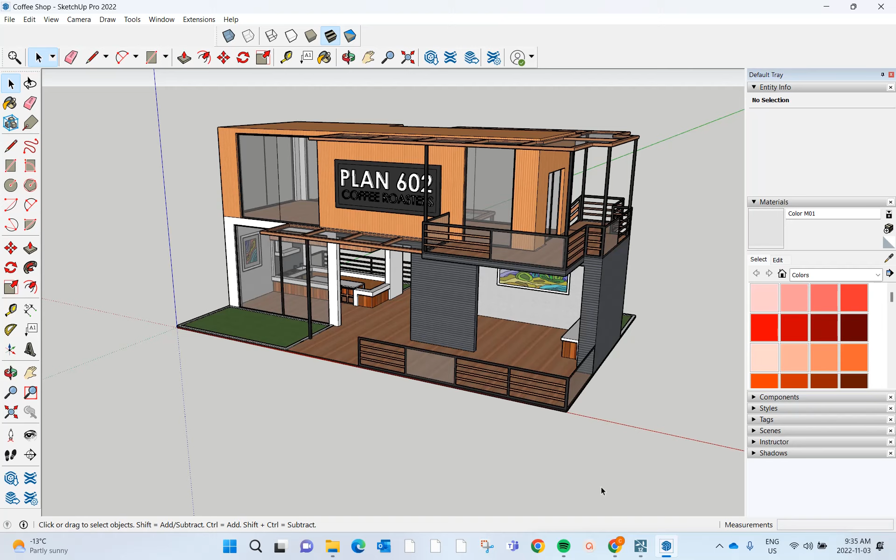Now, the other thing that's really great about Lumion is the fact that it works with different modeling software. I'll just pull up what I was working on here before. Don't worry, this is just a random model I had saved somewhere, so don't panic if you don't have this. The idea is, this is a SketchUp model, but Lumion has the power to import many different kinds of model types. You can work with SketchUp models, OBJ files, 3ds files, and many more. So it's very robust, it's compatible with a lot of modeling software, and all in all, it's just a really great tool for rendering your work in.

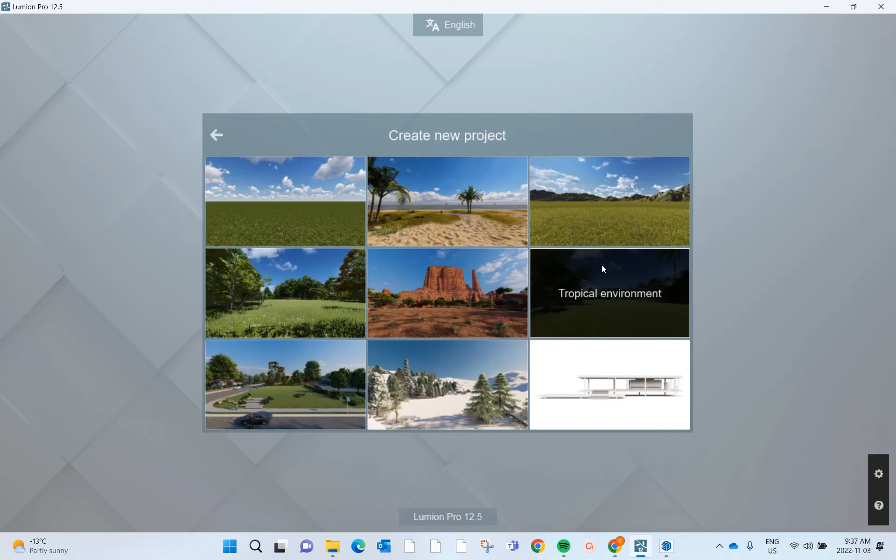Now, if you're faced with this interface here, you're going to have a bunch of options. You're going to have create new, which is really just going to let you go into a completely fresh template. If we click into here, let's have a look and see what we have. As you can see, you've got a bunch of just empty environmental templates that you will be able to import your work into. Now, what we're going to do, just for the sake of demonstration and getting our bearings, we're going to go back one.

Instead, what we're going to do is we're going to move our cursor over to examples. Now, check this out. Maybe it'll look a little bit different for you, but whatever you're currently running Lumion on, you should have something kind of like this, where it offers a bunch of different examples that you can just pop into to have a look around inside. So it doesn't really matter which one we pick. This can just be good exercise for getting your bearings, but let's go ahead and pick, yeah, this one looks good.

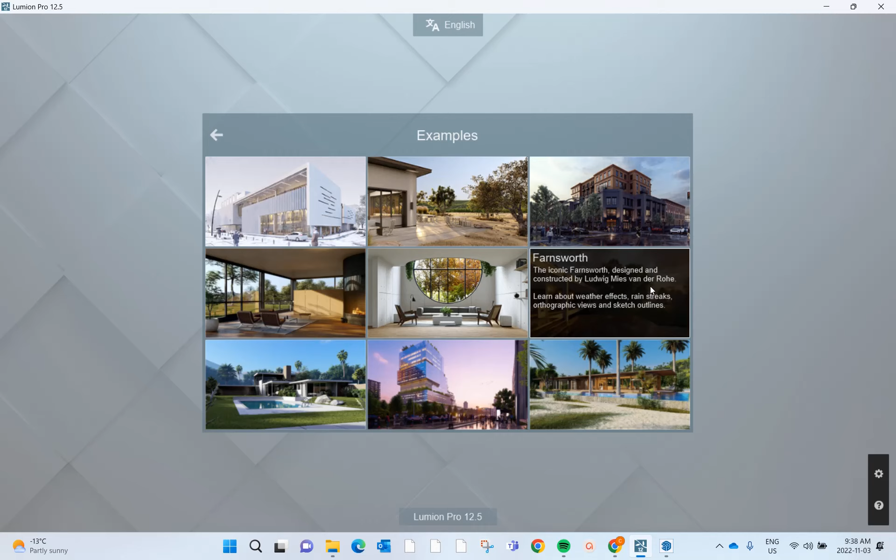Let's try Farnsworth, let's see what that's all about. This will be a good way for us to get used to navigating around without having to do a bunch of work of building a bunch of stuff first. So let's see what one of these examples has for us.

Awesome, so it might have taken a minute or two, but here we are. That's because it was loading tons and tons of polygons, and as you can see when you look around, there's a lot of different stuff being rendered.

So why don't we get a little bit of our bearings. As you can see in Lumion, you're going to have buildings, some movement in the trees, and people. All the built stuff we're working on in Lumion is available to be edited and changed. Currently we're in something called build mode.

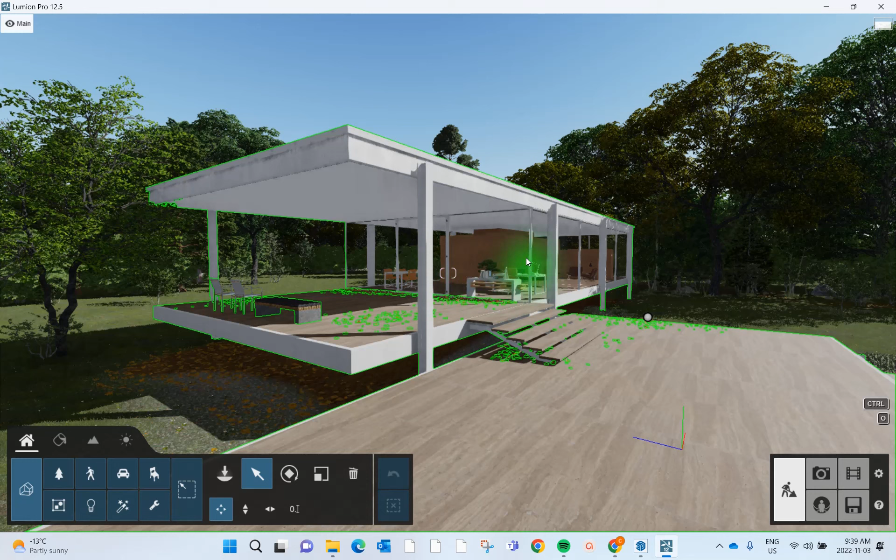Now let's take a little look around here. This is where your 3-button mouse is going to be really useful. If you hold your right click down and drag, you're going to be able to start looking around. I'm just holding right click and dragging, and I can pan just like that.

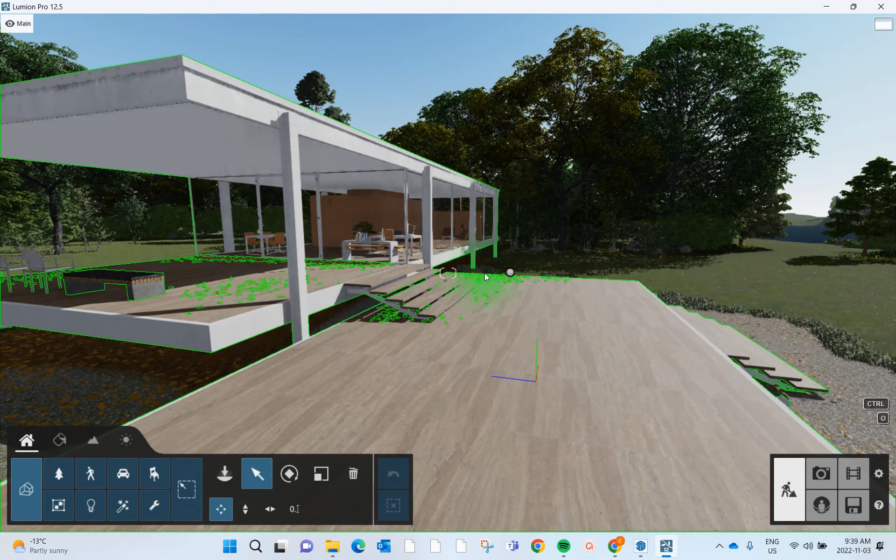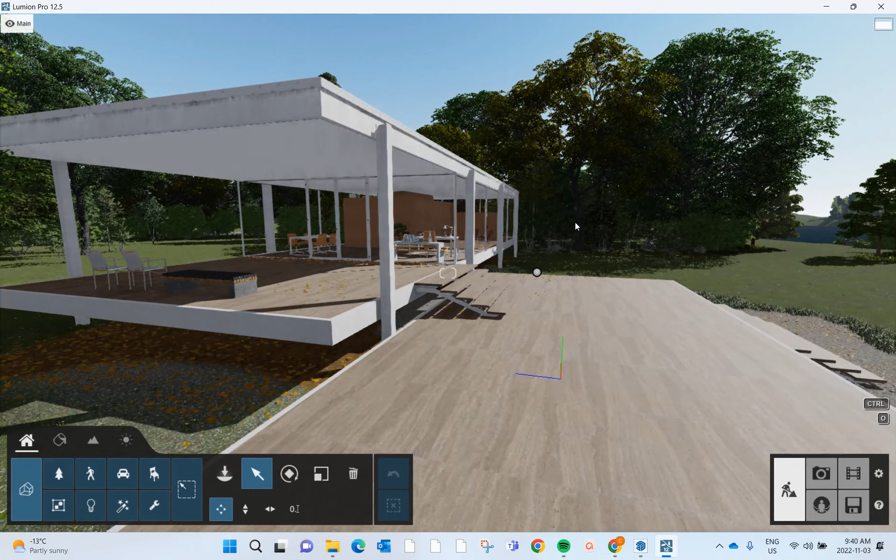If any of you play video games, you'll already be familiar with this. To move in Lumion, you use the letter arrow keys, W, A, S, and D. W is move forward, S is step backwards, D is step to the right, and A is left. You can pan your cursor, hold right click down, and using your arrows decide what direction you want to walk in while focusing your eye line on where you want to go.

But let's say we want to change our perspective a little bit, because getting a different view or a bird's eye view is going to be really valuable. You can tap E to shift downwards, almost like crouching, and Q to shift upwards. So essentially you can move along any axis you want in Lumion.

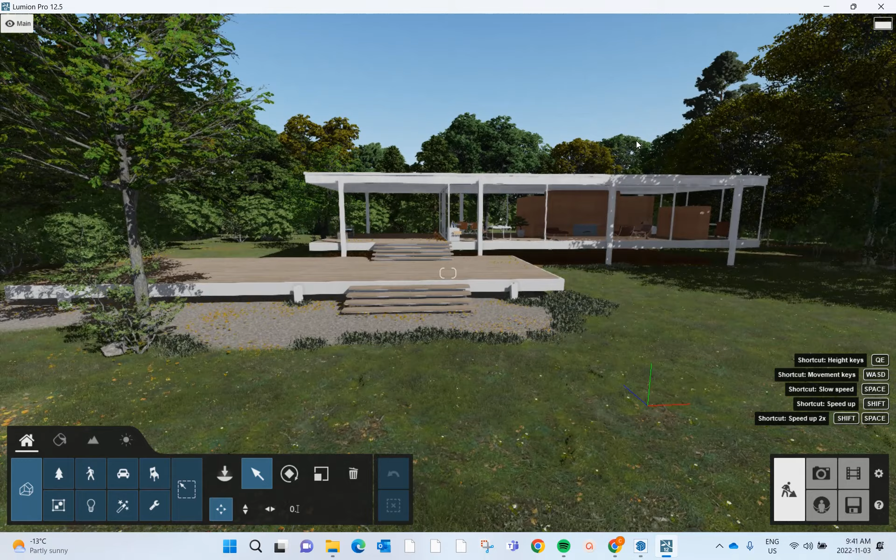So let's say we're ready to change perspective here for a second. We're going to go flying for a minute. Hold Q down, and you'll find your perspective is elevated.

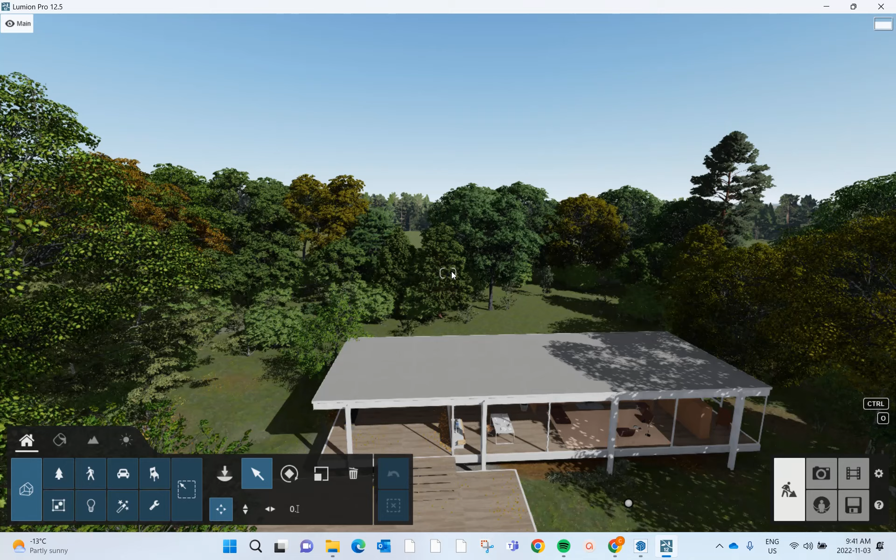Now let's say for a moment I want to see this tree over here, maybe see what kind I picked or what kind of leaves it has. When you're moving around your model, I recommend putting your cursor in the center of your screen, almost like down this little scope, then right clicking so that wherever your cursor is, you're automatically oriented with where you're looking. Then, with the right cursor held down, I can just tap W for forward to start moving towards it.

Now let's say your model is really big and I want to get there faster. So I'm holding W down, but also holding Shift down. That'll zoom me there a little bit faster.

Now, Lumion is really big and powerful and capable of doing tons of unique stuff. Just to give you a taste of what we can do now that we've had a grasp of moving around, let's talk a little bit about some of the essential functions of the interface. Let's get turned around and talk about our interface.

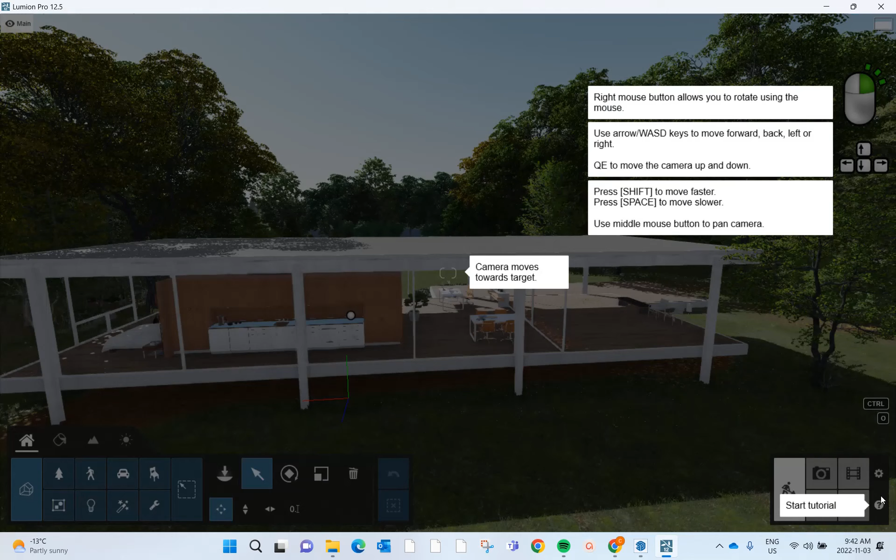Move over to the bottom right of your screen. Do you guys see this little question mark down here? That's a really handy tool if you ever get lost. If you move your cursor down to the question mark, it will give you a quick blip telling you what the different buttons do. So again, if you're ever lost, move your cursor down here and this will get you reoriented.

Now, everything you see in this corner, these four, photo, movie, save, and 360 panorama, all center around exporting. In this class, a big part of what we do is taking things out of the building and working, fine-tuning interface and getting it out of the box into presentation mode. The export section of your Lumion interface is your ticket to doing that.

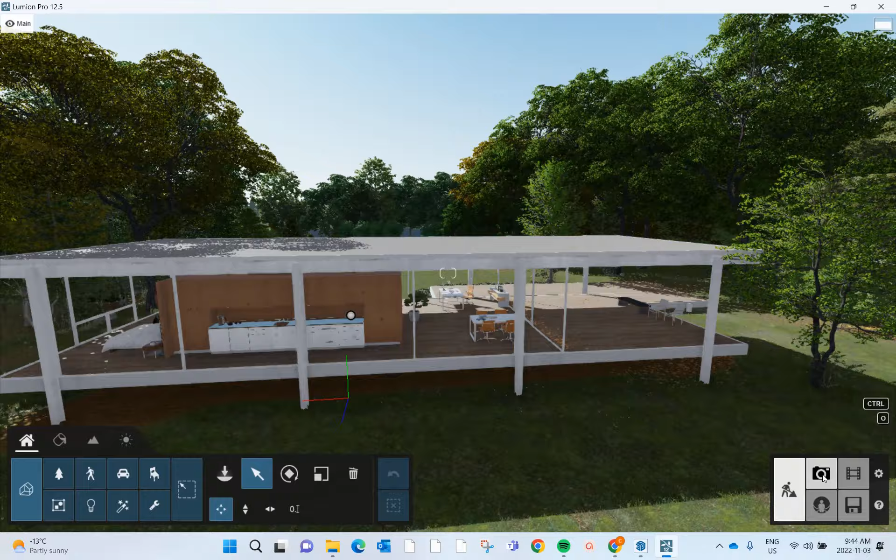Now check this out. Right now, see this guy digging right here? That indicates build mode, and it's highlighted because, like I said before, we currently are in build mode. But we want to see what Lumion can actually export. So we're going to move our cursor over, and instead of build mode, we're going to click on the photo button so we can see how to export a still image of what we're currently working on. Okay, awesome.

So now we're in the photo section of Lumion. Now you're going to notice something right away - obviously this is the direction I was looking in. But if I click into one of these, they're all pre-saved. Check this out, I'm able to look around and move exactly like I was able to in build space.

Have a look at this. We look over on the left side of the page here, we have all of these different effects. These are visual effects which have been put on this still image. This is really where Lumion gets a lot of its value, the fact that it has this portion of its interface where you can save a perspective view or any view you've crafted, apply all kinds of cool styles to it, and save it so you're not losing that view. You can go and fine tune it later on as much as you want.

Now these are all pre-selected effects, but we can still have a look through them and see what they do for our drawing. You guys see the eyes here? It's just like working in Illustrator or anything in the Adobe Suite, where those eyes indicate that it is visible. So let's go ahead and see what happens if we get the little disable effect there.

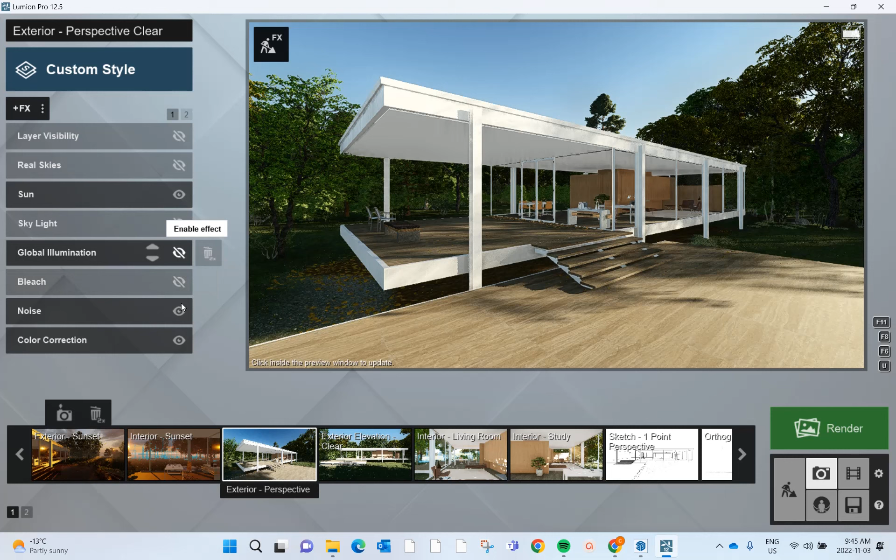Let's go ahead and see what happens if we turn all these off. I'm just going to go ahead and turn all of these off, all of these effects that some nice person at Lumion has put on here for me. I'm going to turn them all off. Now check this out - just like that, it sure is a lot less dynamic, hey?

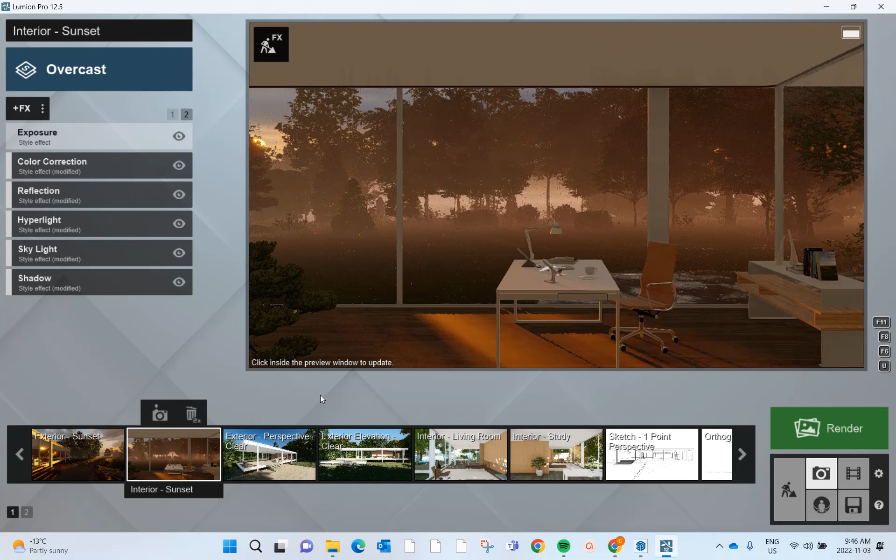It's not quite as impactful as something like this, where it's moody and kind of striking, and it's got interesting sunlight. So the effects that you're able to put on your work in the photo section of Lumion are really going to be the thing that takes your rendering to the next level and really brings it to light. So you'll get a chance to look through some of these, as all of the different templates in the example projects all have different ones.

I guess the idea here is effects are going to be really, really valuable. Now check this out, if we look down in the bottom of the screen, see all these here that I've been jumping through? These are all of the different views that have been saved. So the idea is these are all pre-saved, and you'll notice they all have different effects on them. So as you save different views, essentially in your photo saving component of Lumion here, you're going to be able to adjust your different styles and apply different styles as you want to.

And don't worry, we're going to get into applying those in just a second. But the main idea for this part is different styles and different views are all going to be more or less applicable based on what you're trying to accomplish. So for example, let's have a look at this one - this is an exterior shot of this person's house, and you see that it's got some effects relating to perspective correction.

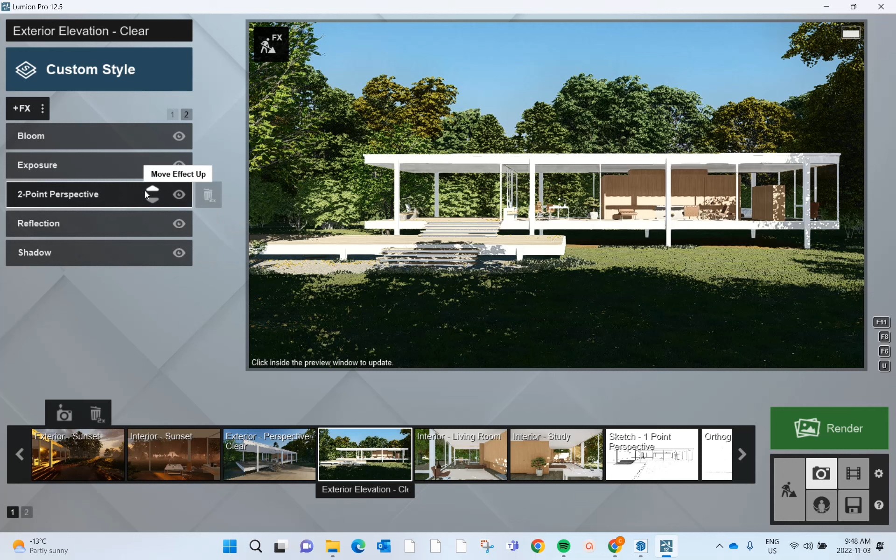But I will say, before we get into that, the big thing with effects is that your greatest asset at this stage will be having some time to play. There's going to be lots of effects that we're going to be able to jump into, and experimentation is a really key component to finding a thing that works for whatever view you're trying to create in Lumion. So let's say, great, we've talked a little bit about effects, we've talked about saving different views and everything - let's actually get into creating a new view of our own.

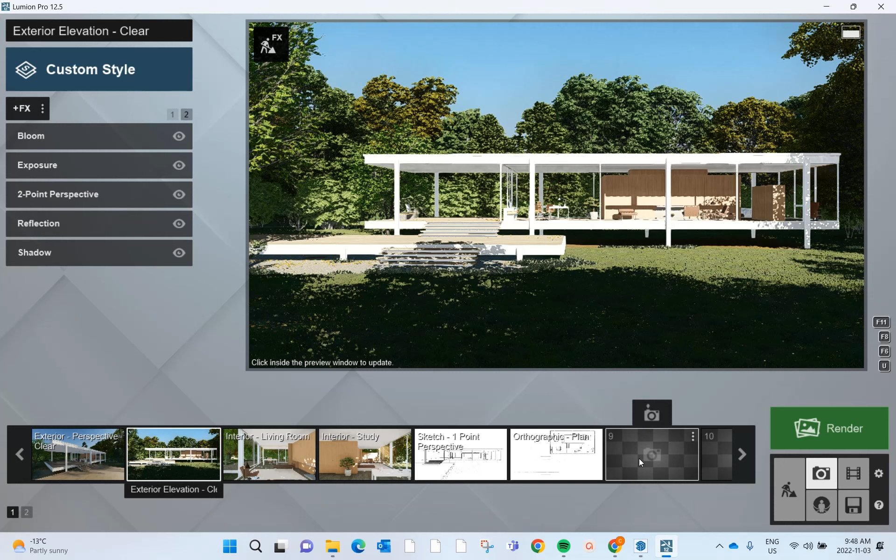So just to recap, we're over in the photo portion of the Lumion interface. We've got essentially this deck of all of the saved views that we have so far, but we want to create a new one. So what we're going to do is move over - you see these empty spaces over here that are free of any saved work.

We're going to go ahead and double click into one of those. We'll double click - whoa, look at that, everything just went away. Now why is that? That's because that doesn't have any effects or styles on it right now. No problem, we're going to figure out how to add those ourselves.

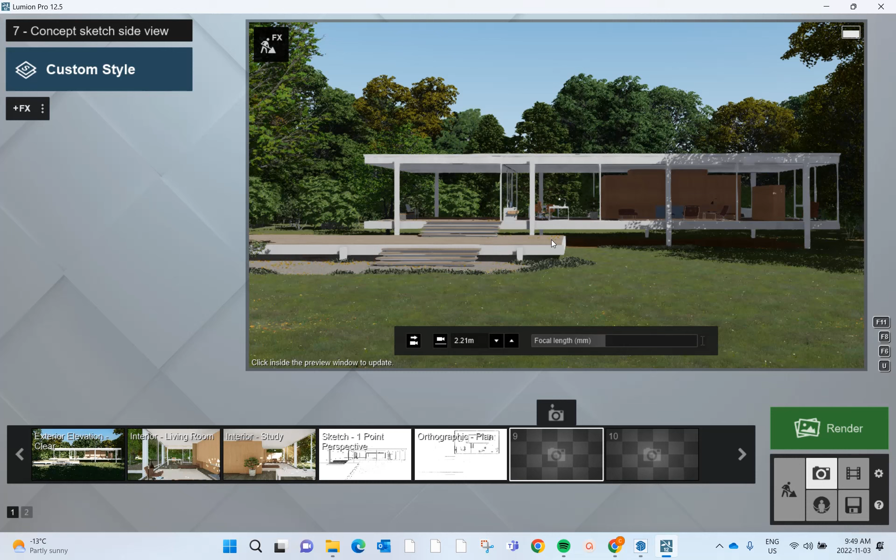So first, now that we have a completely fresh view, let's start by adjusting our perspective a little bit. Just like when I was in building mode, I'm going to take my cursor, move it to somewhere in the middle, and hold down our right click. Let's say I want to shift over a tiny bit to a spot that shows a little bit more of a dynamic view of this neat house somebody's built.

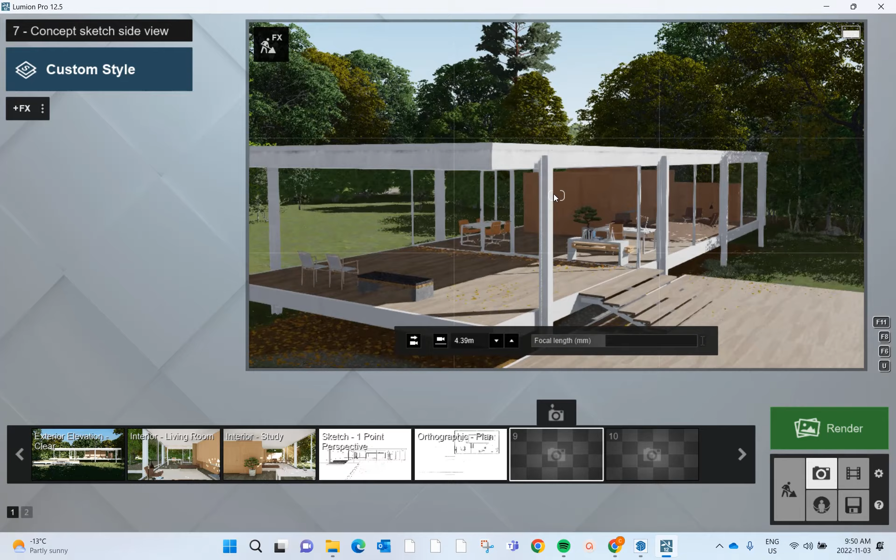So again, I'm just using the W, A, S, and D keys, and holding down my right cursor to navigate to a spot that I'm comfortable with. Okay, let's say for right now we're happy with this. Great, so let's say we like the perspective.

Now it's time for us to start adding some different effects. There's a couple of different ways you can do this, but for now we're going to start with the basic one. If you look over to plus effects, you're going to see the little add effects blip. So let's click into that. Great, so here you're able to select all kinds of different categories of effects that you can apply to your view in Lumion.

I'm going to take a moment to flip through a whole bunch of these here. In featured, you get photo effects for achieving really striking and realistic looking things, whether it's fine-tuning your shadows, adjusting it so that it's got a 2-point perspective, adjusting depth of field, or adding in realistic skies. If you look in the concept section, this is where you can do stuff that's kind of cool with your drawing, like making it look really pastel-y or watercolor, or even making it so that all your work is shown in outlines.

If you're in the architectural section, that's where doing things like sun studies to geolocate your work and make it really realistic to the part of Calgary you're working in can be really valuable. And you can adjust it so that it's in styrofoam. You never know, you might be in a situation with a client one day where they just want to see all the buildings in white, so you have that option.

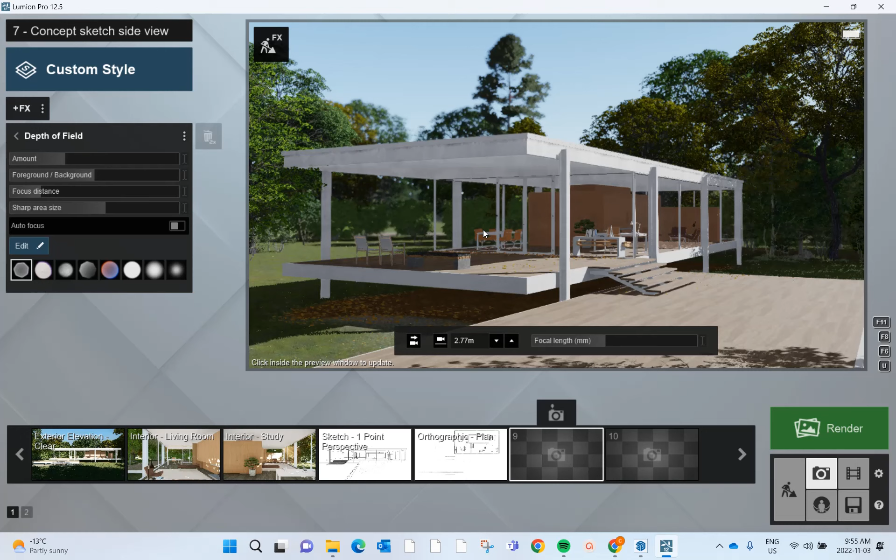So that should give you a sense. Like I say, I was just playing with it for a moment there, just to see what worked for me. That's really the idea behind adjusting your effects. Go back. So that's all good. Great, why don't we try another one?

We're going to go down to effects once again. And this time we're going to pick another one that I think is really valuable, and it'll make your work quite impactful. It's on featured, you move down to real skies. Or I think you can find it in sky weather too, somewhere, I think. Or maybe not, you can just find it in features. So we'll pick real skies and see what we can do with that.

Okay, so just like that, you can see all of the sky in the background got a little bit more believable looking. Your lighting kind of got a bit softer.

So here's what we're going to do. You've got real skies picked. What we're going to do is go down to select real sky. Most of the navigation on these different effects is fairly intuitive, so you're going to find that just by clicking around a little bit, you'll find some different options and variables you can play with.

Great, I'm in real skies. Let's try something relating to morning, maybe we want to try something like that. Once we're here, you'll see you have a whole bunch of different options for morning skies you can bring in. Again, it's going to really depend on what you want to show. Maybe you want to show this building in an evening, or on a really clear day, or at nighttime. With real skies, you're able to do that in a way that still looks believable and realistic.

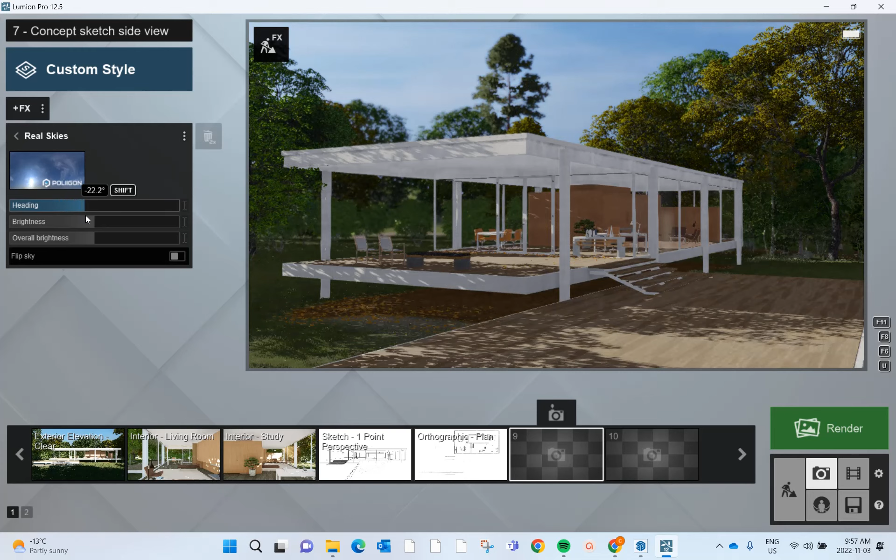Now it's time for us to hop over to our sliders and see if we can adjust this so that the lighting is a little better and more of the building is illuminated. Again, this is where playing with the slider really comes in. We're just going to left click and drag, and whoa, look at that. Just like that, you can see a lot more of our work is essentially illuminated. Now I know there's tons of trees right now, but you get the idea.

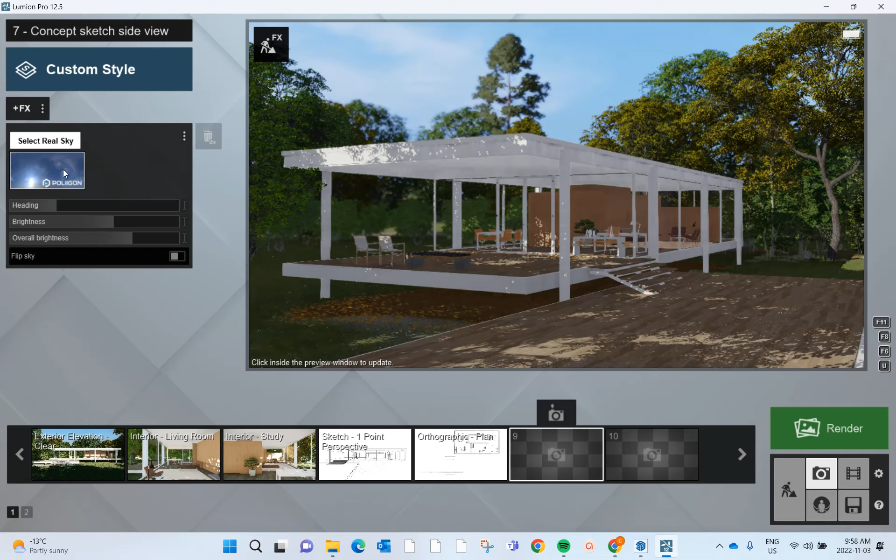You're essentially able to trick out where the sun is located based on where your heading is. You're also able to adjust the brightness of your entire image, because if it's a little dark, okay fair enough, but by grabbing the slider and dragging it up, maybe you find your work is shown with just that extra little bit of clarity. To adjust the overall brightness of the sun, we can go down to this slider here and click and drag just to make the sky pop a little more.

But just to give you an idea, let's say, okay, I don't want to show this in the morning. All I did there was click into real sky, and maybe I want to show this during a nice, bright, sunny day. I'll pick something like clear sky. Again, playing is what it is all about at this stage.

So great, okay, suddenly that's way better lit. I can still adjust my heading. I can really do whatever I want with it.

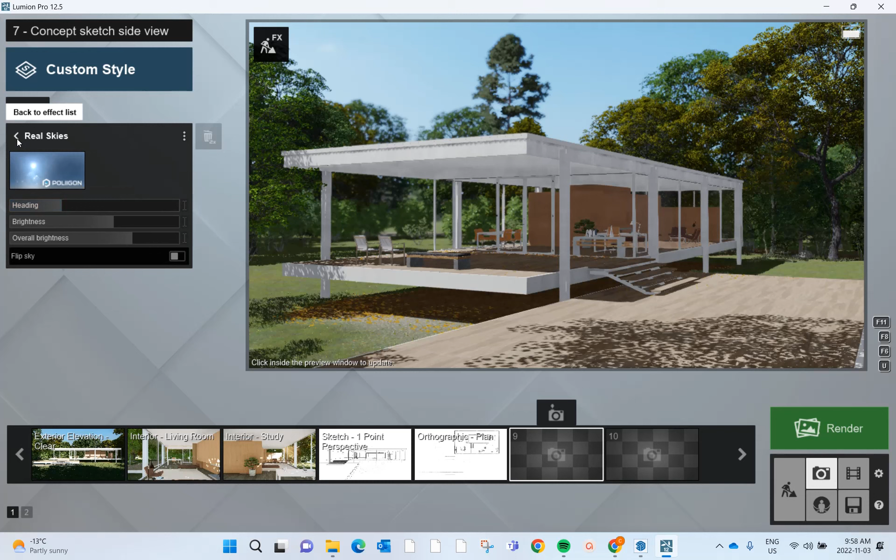So all this is good, but what Lumion is really valuable for is making it really easy for us to take it to the next level and really make that realism kind of pop. Check this out. I know I've shown you a couple of effects to plunk into your view you've created, but thanks to the nice people at Lumion, we can do a lot of this way quicker. We can have a lot of these effects in and dialed in a lot faster. Here's how we do that.

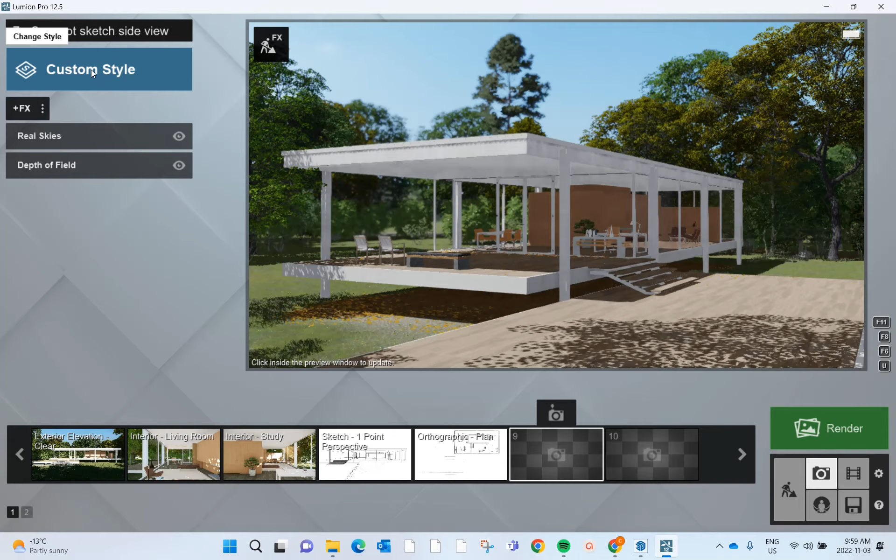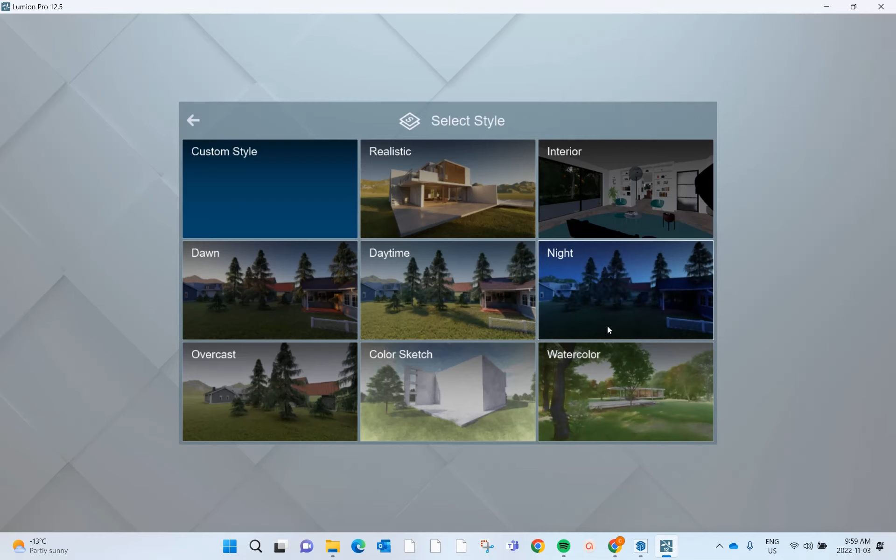Instead of picking add effects, we're going to go up to custom style. We'll left click and have a look at this. These are all pre-built packages of effects. As soon as we pick one of these styles, that's going to throw in all of the effects and styles required to achieve, for example, a really realistic render, or a render to make it look like a color sketch, a watercolor, or a nighttime scene. For now it'll really depend on what you're trying to show, but let's go ahead and try realistic. Let's see where that takes us.

Now check this out, way more impactful already. The colors are popping, there's good contrast in the trees. That's all good. But check this out, all of the ones we already inserted, depth of field and real skies, that didn't blow them away. They're still in there. We just added in a whole batch of new effects from the realistic style we picked up here at the top to achieve this. So just like that, Lumion has pumped this new view full of a bunch of really cool new effects and styles to help us take it to the next level.

So that's that, great. Now, oops, just give me one second here.

By the way, how's everybody doing with this so far? Am I going way too fast, or is this okay right now? Anybody totally lost at this stage? Okay, sounds like people are okay. Okay, wicked, okay, so awesome.

We've got a few effects going on here now, but what have we not done, and what is the really important step at this stage? We haven't saved our work yet.

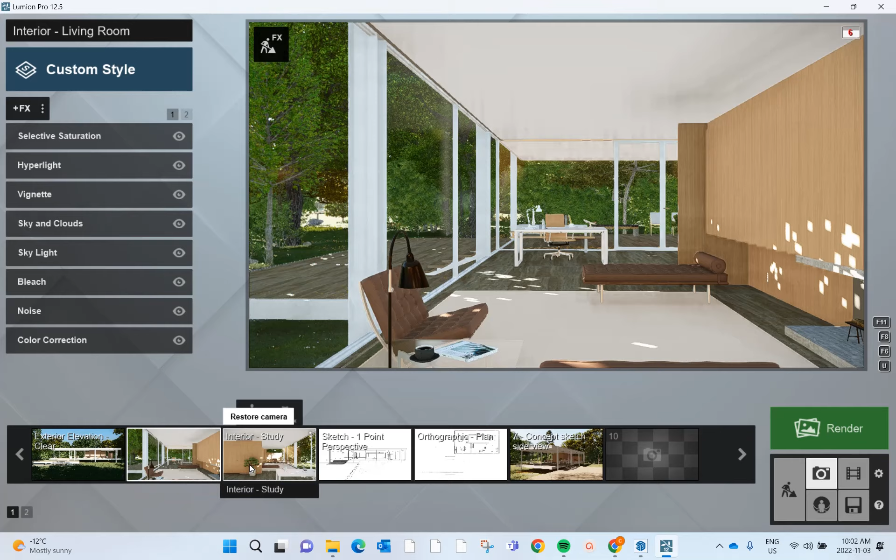Perfect, so check this out now. Now that that view has been saved, if I click away from it, look at another view, maybe futz around with a different view, but then click back to this, look at that, it's all saved. All my effects and presets are all saved. It's all living somewhere where I don't have to worry about losing all that hard work I put into fine-tuning that view. So that's all great.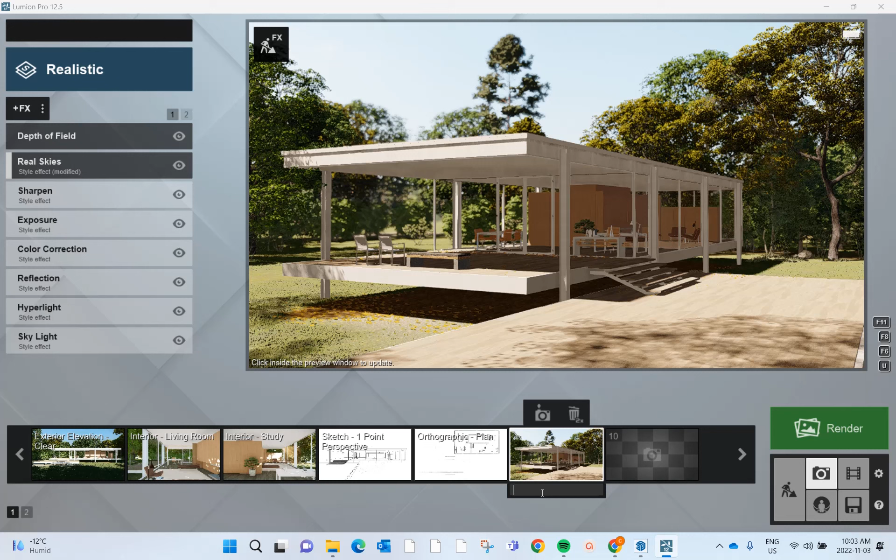And just for good measure, because we always talk about making sure you are saving your views and perspectives with logical names, let's go ahead and give this a reasonable name too. If I move my cursor down to the bottom of the view tile where we're seeing the thumbnail, and pick left click, you'll notice you have the option to adjust your title. So let's say I want to call this something easy. We'll say perspective view.

Great, you can click anywhere outside of it. And just for doubly good measure, because I always save everything about a million times, we're going to hit that, store that in camera. It's probably unnecessary, but you can never hit that button enough times. I would hate to ever see anyone lose their amazing work. So this is all good.

We've saved the view, we've named it, we've put some effects in, and we're happy with that. But there's another really important step—we don't want to lose anything we've done so far today. We're going to move our cursor to the corner here. Right now we're working in photo. We'll slide over and down one, and move down to save and load projects, then tap left click to get to save.

Now I'm currently working an example, but typically you're going to have an option to save it as, and that'll take you to wherever you want to save it. So yeah, I should save this somewhere—we'll just say perspective one. It doesn't matter. I know we gave you a bunch of saving naming conventions that I've done a terrible job of conforming to, so do as I say, not as I do. Sorry guys, but you get the idea.

So once I've saved my work with the little floppy disk down there, I'm going to move my cursor back over here. Now we'll go back to photo for a second just to make sure—yep, everything is saved and looks good the way we want it to.

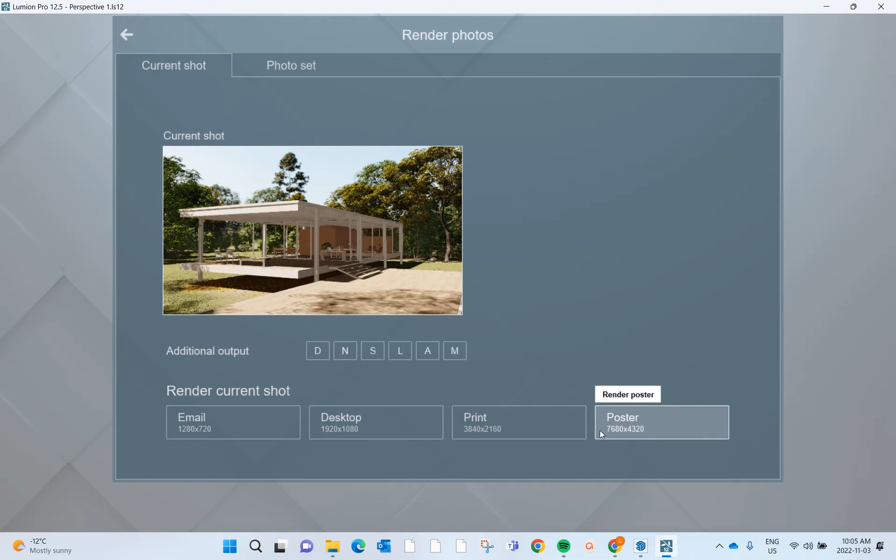If it's something quick and you just want to spit out a quick thumbnail, you can pick email or desktop. Obviously if you're printing something on a poster down the road, or presenting your work on a big board, the poster option—when you look at that DPI—is really, really great. But for now, let's just see what happens if we pick desktop. Let's see where that takes us.

Left click. We're going to put this in—okay, yeah, sure. So we'll just say perspective rendering 1. Great, we're going to move down to save, tap left click.

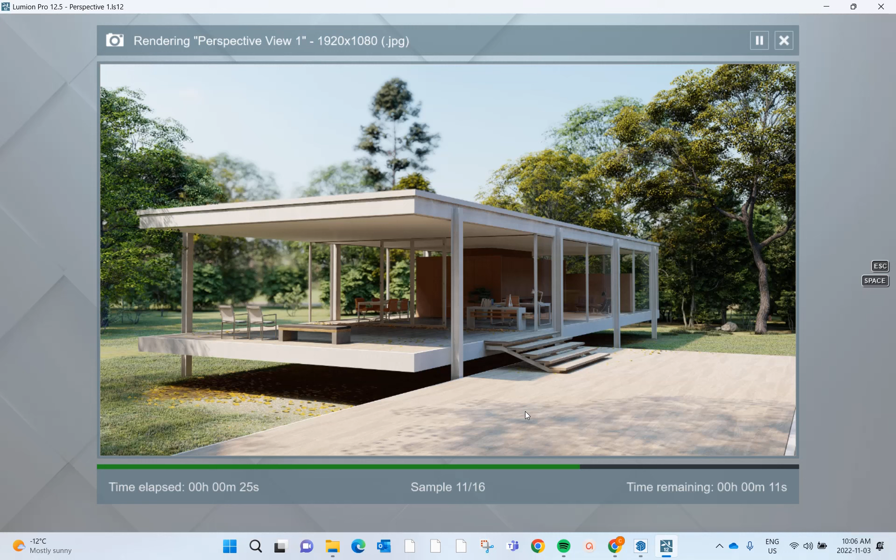It might take a moment here because it's going to try to process a whole bunch of stuff, but check this out—it'll take you to a screen kind of like this. It's going to chew through all the effects that we've put on it, and try to turn everything we've just viewed into a nice finished actual product that could then find its way to InDesign or wherever you want to show it. Might take a minute or two here, no worries, because in a moment we're going to pop this open.

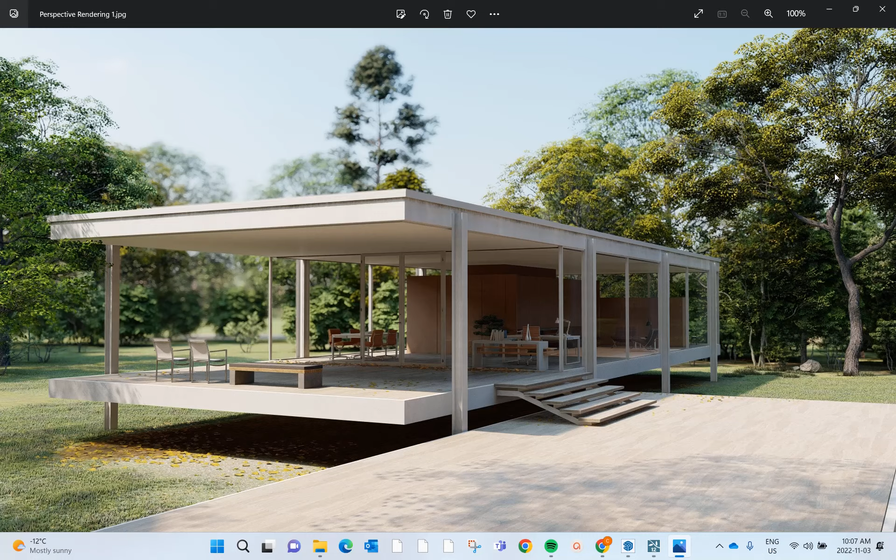And I think I've got the file saved here. Great, so it appeared in my working file. Let's see what we got—we're going to double click. Right on, okay, so not bad. We can see there's a good amount of realism to that. The lighting is good, it showcases the differences in perspective and everything. So that just goes to show you how quick you can tune up and produce a really, really cool rendering with effects in Lumion.

So that's all well and good, but here we'll go to OK to get out of that. That's all good, but let's get to know some of the actual tools that we can use to actually get our model to this stage that we can adjust in Photoshop, or in the photo section rather.

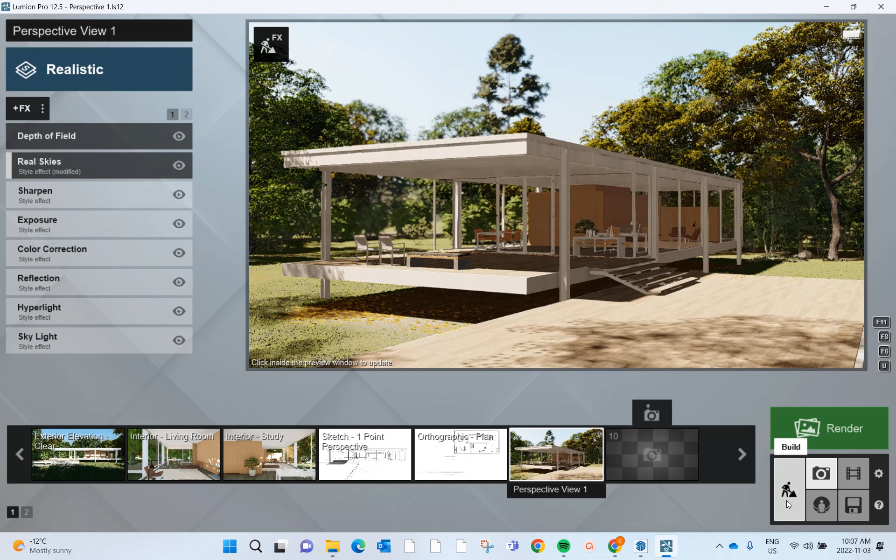So what we're going to do is—we've been working in photo this whole time—we're going to move our cursor over here and go through our build tool. You see this guy digging right here? That indicates build mode, so we're going to click on him to make that active. And just like that, we're actually back in build mode. Now in build mode here, I'm going to just move this over a little bit, adjust our location a little.

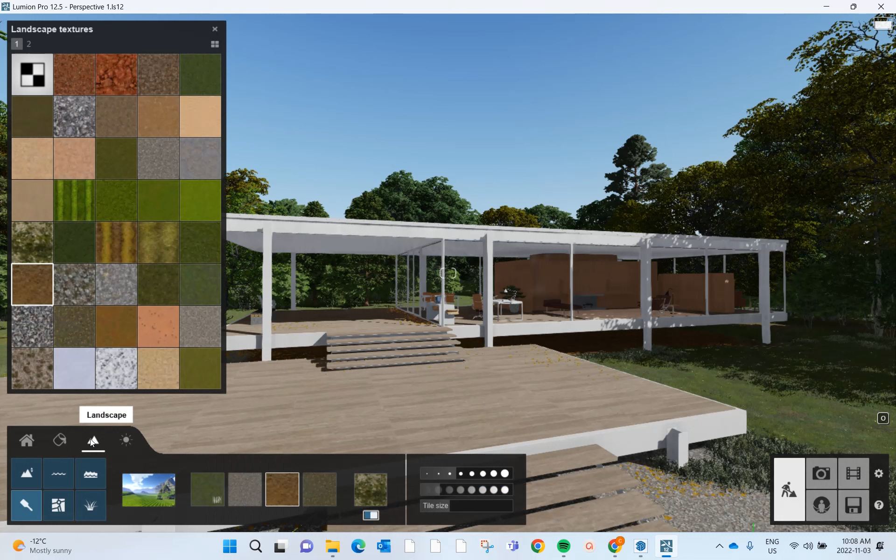Once you're in build mode, you're going to have the options to adjust all kinds of stuff in this world that you've created. You're going to notice you have content you can bring in, materials in your model you can adjust, landscape that you can revise as you want to, and weather, which you can manipulate as you need to.

We're going to start by taking a look at the weather. In build mode, weather affects sun height, clouds, brightness, that kind of stuff. You're going to be able to do things like adjust your skies and your clouds, your sun direction, the time of day, and things like brightness and wind speed.

So let's try it right now. Let's start over on the left. We can start by adjusting the different clouds and skies that we have in our map. Let's left click and pick under select clouds. As you can see, you've got lots of different options here. You can have a clearer day, or a cloudier day. Let's try something kind of different here.

Okay, great. Now let's say we want to actually—alternatively, you can also turn on real skies if you want to. And you're going to see that you're able to actually adjust that as well. So much like what we were discussing before, you're going to be able to have some fun and play with that as well.

Now let's say we want to adjust our sun direction a little bit, depending on what time of day that we're working in. Just by clicking and dragging the sun icon right here, we can essentially adjust where the sun is located based on where our cursor is. That's all really good—you can adjust that as you need to, and there might be different times where you want to showcase different stuff, so that's going to be useful for you.

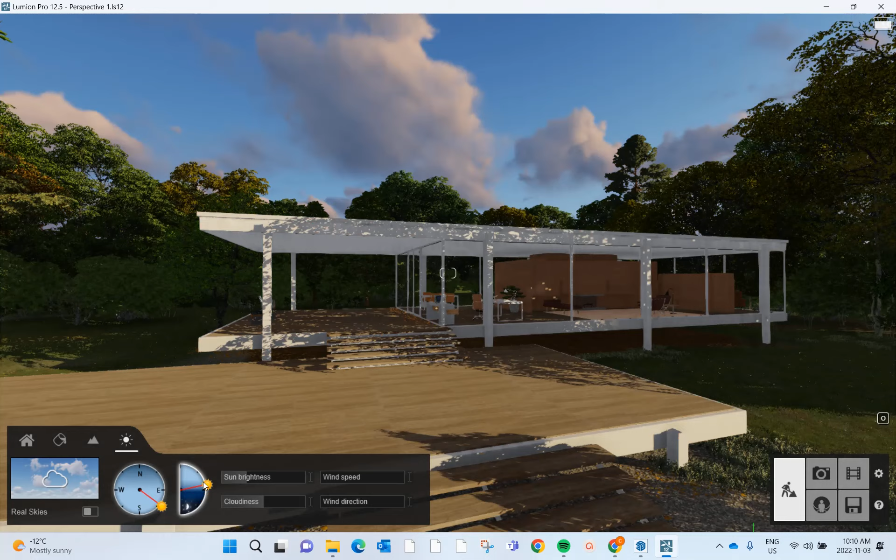Now I realize we'll probably adjust that a little bit more as we need to, but you get the idea. You're essentially able to tune your lighting and time of day as you want.

If I want to do things like adjust sun brightness, I can move over to this slider here, left click, and drag. And whoa, if I drag that all the way up, that is an obliteratingly bright and way too sunny day, so that's a little bit too much. But we can just drag that cursor right back to have a more reasonable amount of sunlight.

If I want to adjust the level of cloudiness, I can do that as well. Once again, I just click on the slider, and I can drag to the left where there's no clouds, or drag all the way over to the right where there's tons of clouds and it's a super cloudy and overcast day. Again, it really just depends on what you want, but it's super easy to adjust.

Maybe I want wind speed. I know in assignment 2, there was talk of making space areas that were kind of protected from a really windy spot. So if you want to show really windy trees in the background, that's totally possible too. By left clicking on wind speed, holding and dragging, you'll notice it's actually possible to show your work kind of blowing in a breeze. If I really turn it up, you'll notice the trees start to bend—you kind of have the power to show something on a windier day.

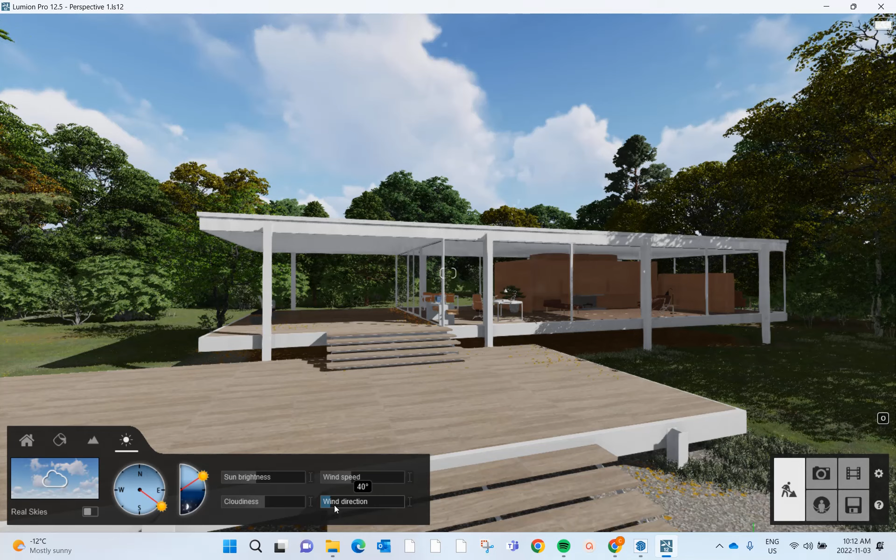If I want to adjust wind direction, once again, left click and drag, and you'll notice you have the power to adjust that as well. So really, you can fine tune your environment and your weather as much as you want. Okay, so that should give you a bit of a taste for the weather tab.

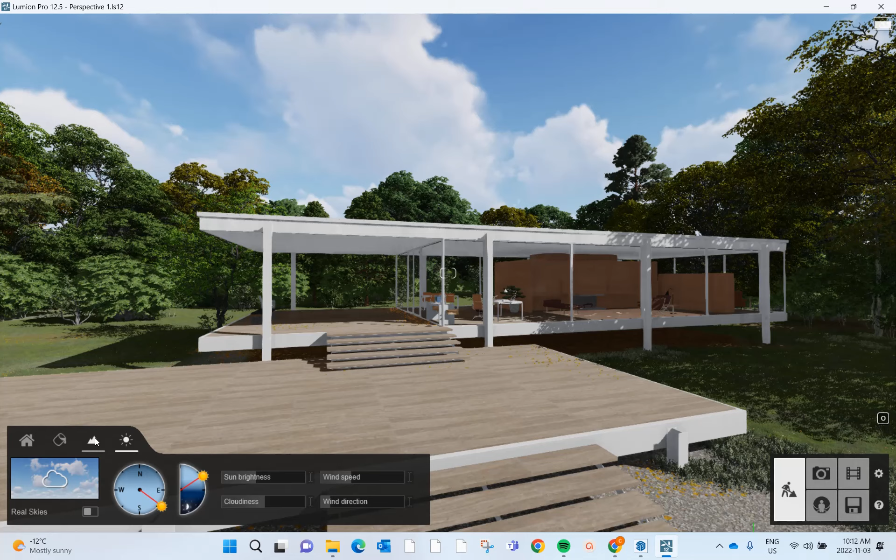Now we're going to move over one. You see the little mountain icon here? That's the landscape tab. So I'm going to show you what that's all about. Pick landscape.

And we're going to rotate around here so that we can actually see a little bit of our landscape. Okay, great. So landscape is lots of fun. You can raise and lower terrain, you can smooth it out, you can sort of adjust your landscape as you like.

So let's start with height. We're going to left click and pick the mountain range with the little up and down arrows. Left click, and you'll notice a bunch of different options and icons come up. We've got raise, which means whatever's inside this yellow circle is going to be elevated. You can lower it and create a bit of a pit if you want to. Flatten, if you want to make something jagged and jittery, you can. Or if you want to smooth stuff out, you can as well.

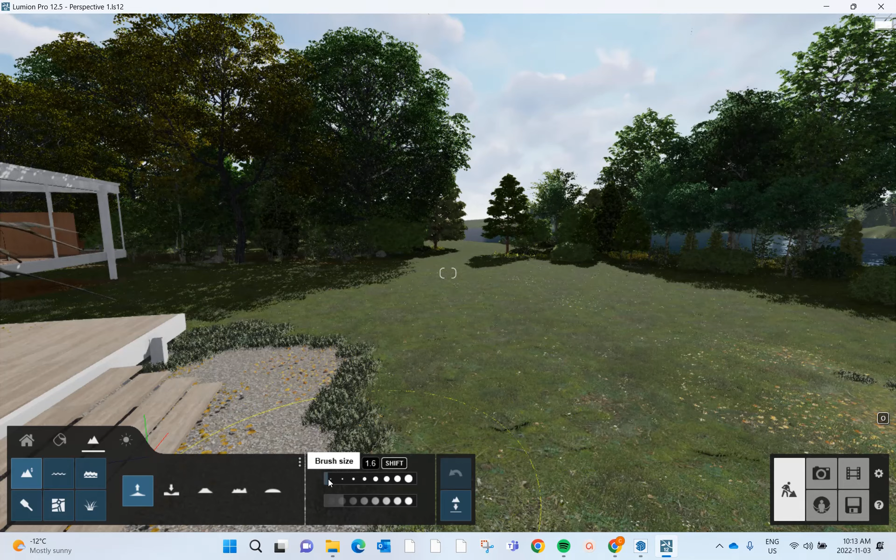As you can see, this circular cursor is very, very big. So if I want to adjust the size of that cursor, the height and width, I can do that as well. I can left click and drag to make it really, really big. Whoa, that's really big. Or I can left click and drag it all the way to the left to make that cursor a little smaller. Did you guys see how the cursor changed in size there? Bigger and smaller? Okay, good.

Great. Now, before I explain this one, let me go ahead and show you a little bit about what this does. So right now I've got raise selected, we're going to go ahead and try something. I'm going to left click and hold. Just by clicking a little bit, you're going to see that started raising it up. Now watch what happens if I adjust my brush speed.

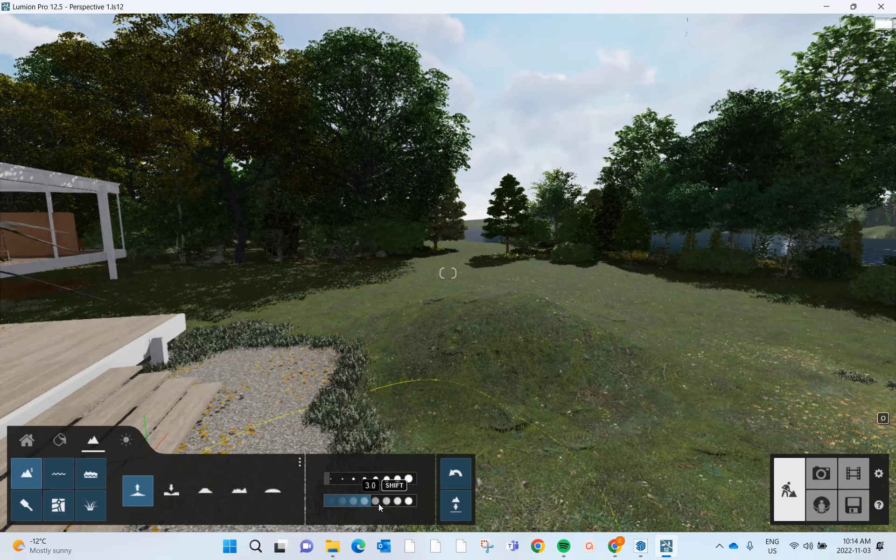I'm going to drag it down a little bit first. Here, first I'm going to undo this. I just dragged my brush speed down a little bit so that it's really, really low. If I left click and hold, look, just like that, that starts raising it a lot more slowly. But watch what happens if I turn my brush speed all the way up. Whoa, geez, okay, that's way too much. You get the idea though. Essentially, you're able to tune both the size of the brush and the speed at which the brush applies that command.

And that's going to be applicable to a few elements of your landscape too. Now, let's say I want to just undo everything I just did. What I'm going to do is move over to the right here, you'll notice an undo paint landscape. So I'm just going to left click, tap. Yep.

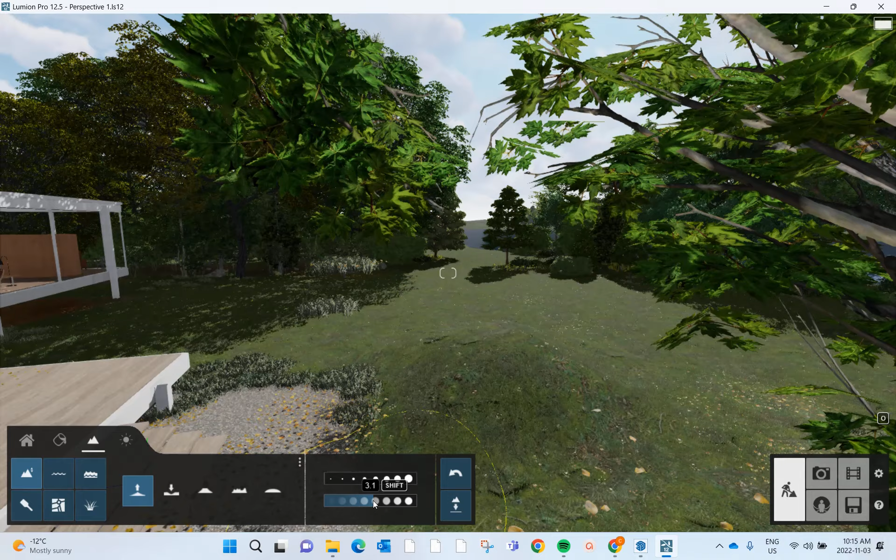What you can do is you can essentially adjust your brush size. So, are you saying you'd want to create something that's sort of mountainous and a little smaller? Okay, sure. So what you could do in that situation is make your brush nice and small. You can essentially tune this down so that it isn't too jittery and quick. And what you can do is start clicking, and you can sort of adjust your bank size, I guess, as you want to. That way, you can click along it, and there's going to be an element of trying and checking a little bit.

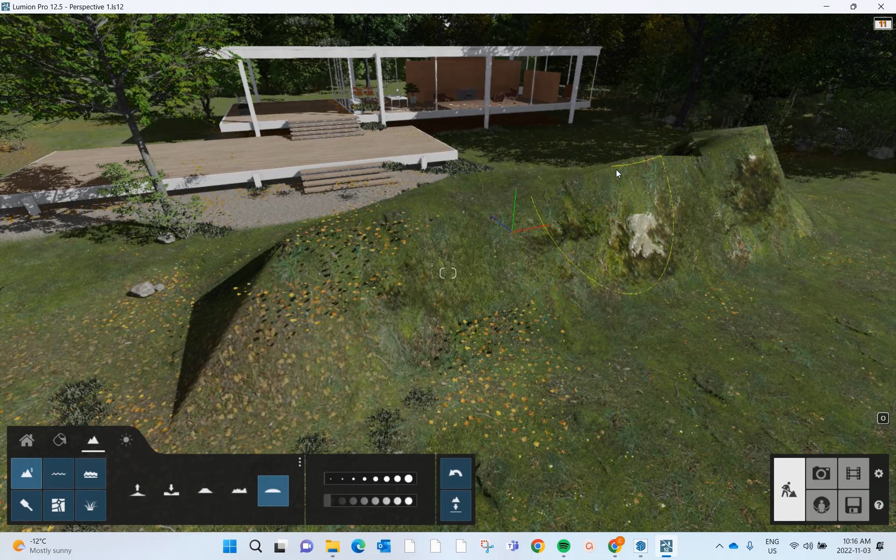But let's say, yeah, if I want to craft a berm of some sort, I can certainly do that. I can kind of move my cursor along with the cursor being nice and small. And let's say, okay, that's super jagged, that's not really quite what I want. That's where I could then move my cursor over from raise over to flatten, or smooth rather, and I can pick that. And what that'll essentially do, I'm just going to turn my brush speed down a little bit. That'll essentially flatten my work out a little bit, so it creates a more realistic looking berm and it's not quite so jagged. Does that make sense?

Okay, great. So yeah, there'll be some playing with brush size that'll be necessary, but you get the idea. It's certainly possible to create a hill or some sort of a berm or bank to a specific size, but it will take some playing, and that playing will happen both with brush size and brush speed. And again, these different tools will serve different things for you, but I think raise and smooth will be your best bets.

Now, that's actually a really good question too, because that leads me to also transition to another really important element of working with landscape, and that is the paintbrush. So here's what we're going to do with that. I've got height, and then I'm just going to move my cursor down, and you see the little paintbrush icon there?

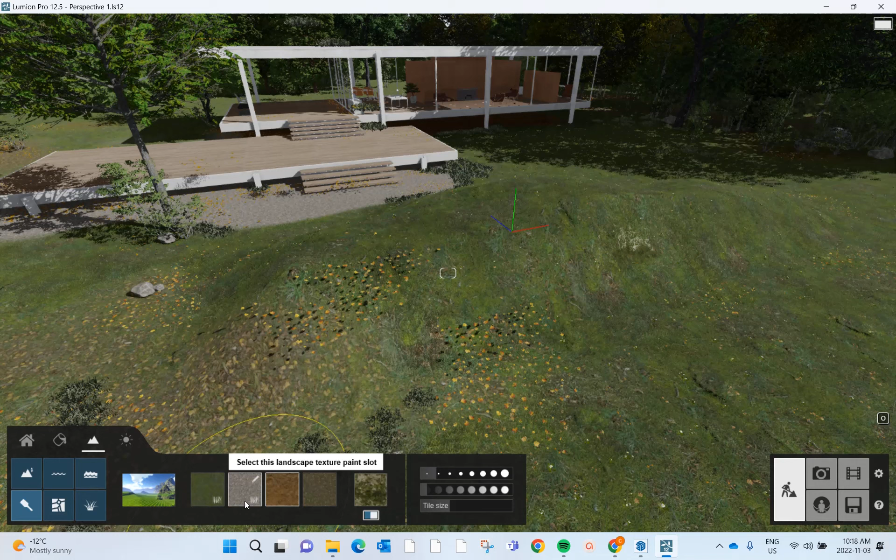We're going to pick this. So what you do with the paintbrush works very similar to applying your different heights. Just like before, you're able to adjust your brush size and brush speed. Let's say you want to create a bank that's kind of pebbly. You can pick a landscape here, and I've clicked this one because I want to paint something that's sort of bermy and looks like a bit of a shoreline.

Once it's selected, I move over to the area I want to paint and hold left click. Now you might think that's not doing anything. Here's why: if I move my cursor down here, I can adjust the brush speed just like before. If I drag it up so the material applies faster, then click and hold, I'm able to paint it up. So if I want to create a bank, I can do it this way. If I want a bigger patch, I can drag upwards and apply a whole bunch of it to a mass. And if I want to adjust it to be small and more detailed, I can do that too.

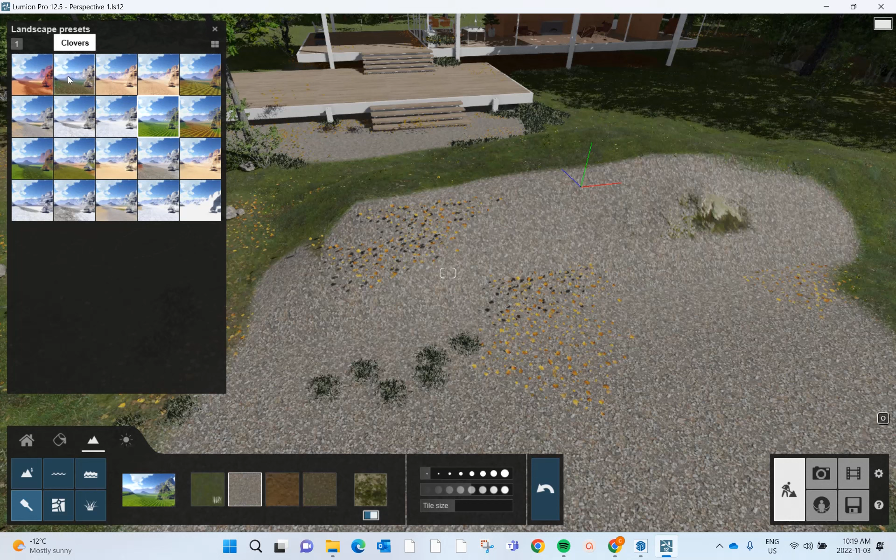So all this is good, but let's say this climate I'm applying my different materials in isn't quite what I'm looking for. Once again, Lumion wants to help us pick something perfect for what we want to achieve. If you look in the paint section of the landscape portion, you'll see the option 'choose landscape,' with a thumbnail of this nice glade. If I left click, I have a whole bunch of different landscape presets to choose from.

Just for fun, let's see what Egypt has to show for us. So we'll pick Egypt and check this out. Whoa, that just changed everything. It changed the different materials we have options to apply, and it changed all the groundwork and everything like that. That just goes to show picking different landscapes can completely change the atmosphere for what you want to show.

So we're going to go ahead and pick this, and go back to what we had before. We'll go back to grass, since we want to keep it something that's reasonable. So all that is good, but once we've landed on something we're happy with, let's go ahead and change this back.

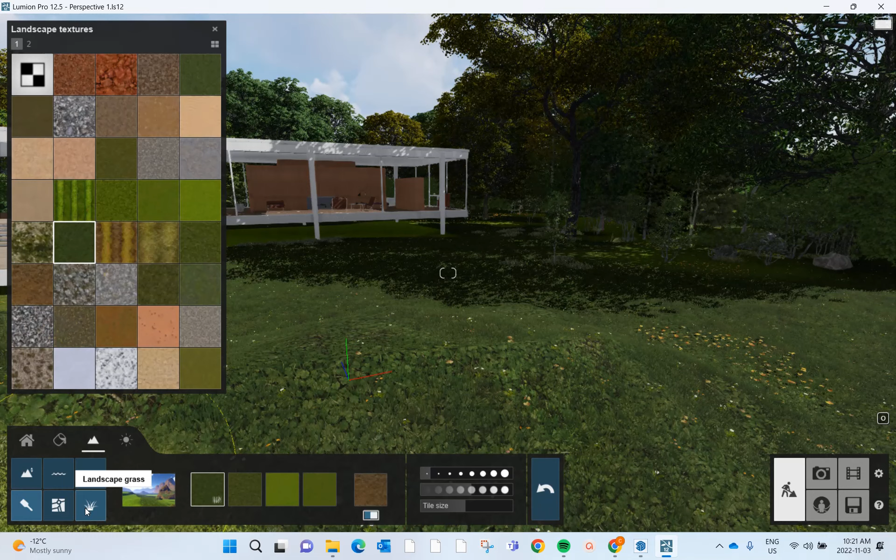Once we've gone ahead and landed on something we're pretty happy with as far as environment and terrain, there's something else I want to show you guys, just down to the right here, two over from paint. That's the landscape grass option. We're going to go ahead and pick grass, and now check this out.

Grass is one of those things that, especially for landscape architecture students, softscaping is such a huge element of making a space cool and friendly and like it's meant for people to hang out at. This is where being able to adjust your grass is super valuable for us. Let me show you what we do. Once we're in the landscape grass portion, we move our cursor over and look at this: we can adjust grass size, and we can adjust grass height by left clicking and dragging on the slider.

And we can adjust grass wildness. We can make that grass really, really wild if we want to, if we want this to be a totally untouched glade kind of thing. And again, that's just by left clicking and dragging and adjusting your wildness as you want to.

Now, as wonderful as it is to have tons and tons of grass all over the place while you're working on your model, I know it can be a strain on your machine. As you can probably hear right now, my machine is absolutely humming up a storm. It can be a lot to process, and for those of you unsure about what your computer can handle, there's an option to lighten the load of what you have to render, and that all starts with grass.

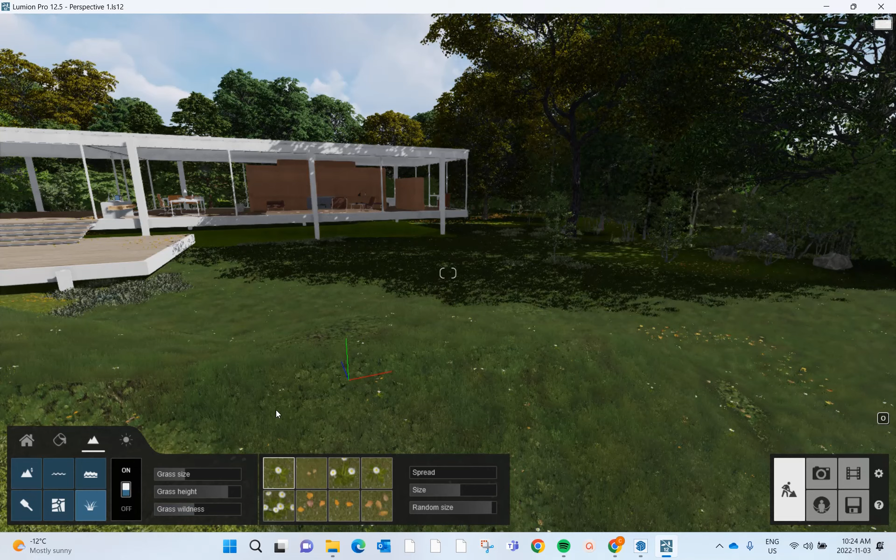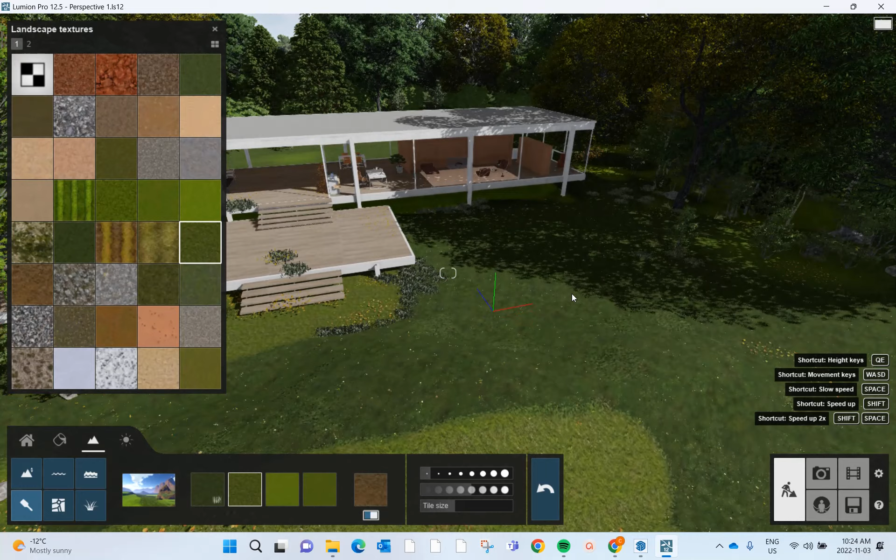Yeah, sure. I think all I did here was take this material, and you can essentially just take any other material and start drawing as you want. Do you mean like, do I just want grass on one part? Okay, sure, not a problem. All I can do is zoom out a little bit and take a step back for a moment. Okay, yeah, good question.

I could take my brush, pick a different material, say another landscape texture or something like that. What I could do is take my brush, make it nice and big, and let's say I just want to keep this strip of green grass right here. I'd pick a different material that's different from my green grass, make my brush big, and make my brush speed nice and fast so that when I zoom out, I can just mass apply this other material.

And essentially just maintain that little bit that I want to keep as grass. Now, mind you, this is all landscape stuff we're working in right now, but I can certainly paint around this and make it a different bit of material. And if I want to, just keep that little patch of grass I had as just grass. Does that help? Okay, wicked, cool.

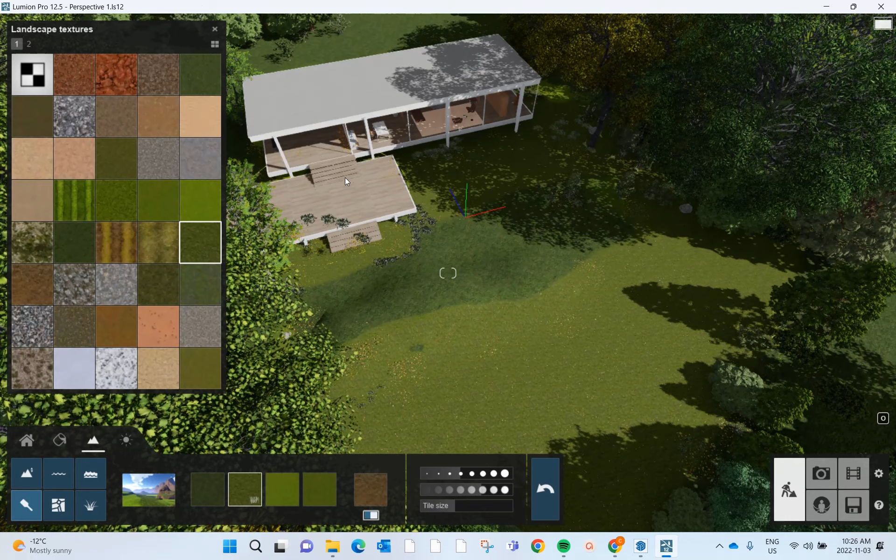Once again, good question, but this is all natural landscape stuff. Being able to do things like paving and all that, that's not landscape, but we'll get into that in just a minute.

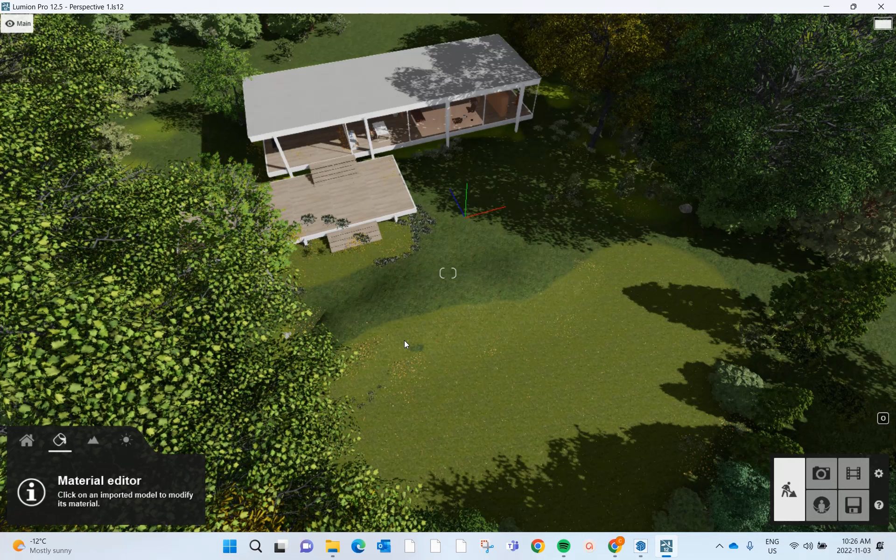Okay, on that note, that brings up another really good thing here. We'll go ahead and undo all that. That's one more tab of different stuff in the build mode, and that is materials. We're going to tap left click, and you'll notice it starts by giving us a prompt. This is where you are going to adjust all of your materials in your project.

And you're going to notice something, we're going to zoom in a little bit here on the actual model stuff that we have, which some other nice person has imported in, but we'll get a chance to import our own work in just a little bit. So I've got material active. Now here's what I do next. I'm going to move my cursor, and you're going to notice something.

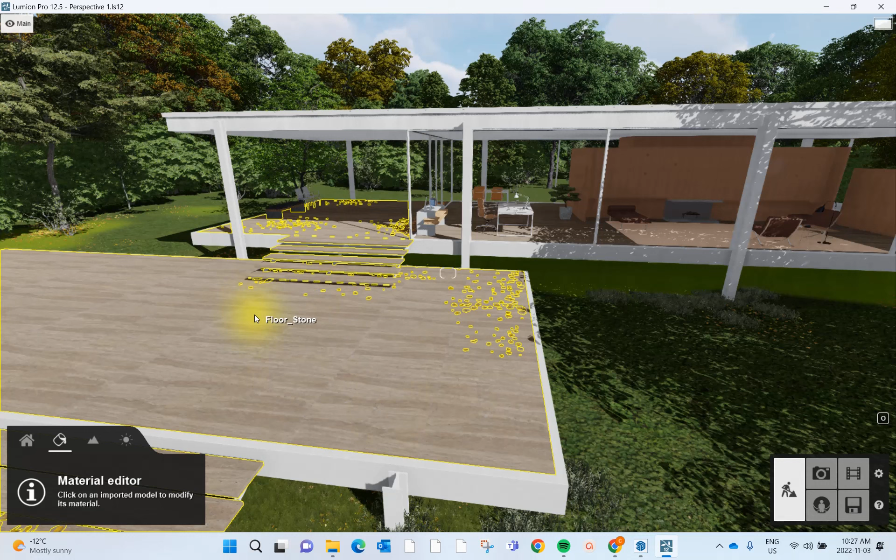As I move my cursor around, you're going to see that different materials are illuminated. Essentially, once a material is illuminated, that means it's ripe for being adjusted in the material editor if we need to. So just for fun, let's say we want to take this deck here and adjust that material. There already exists a material on it, which is good because that means there's something for us to change. With that material illuminated, we're going to left click.

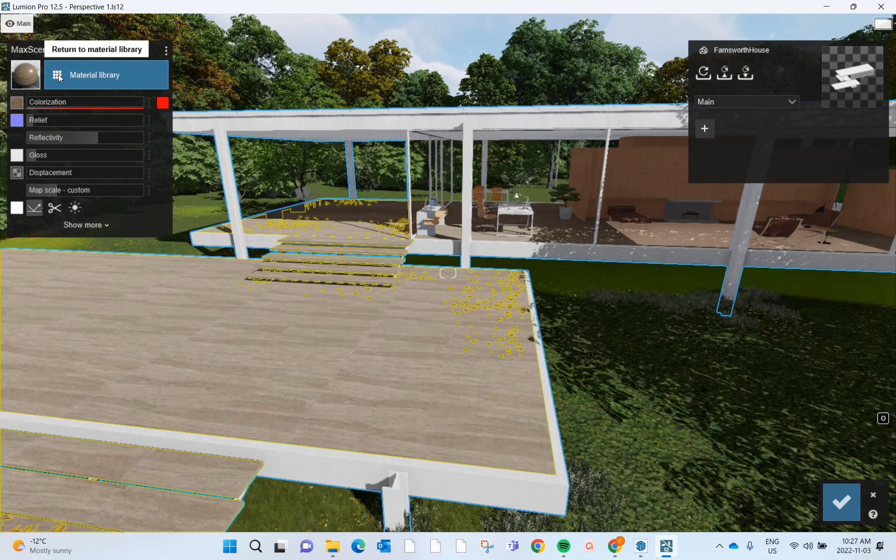You're going to notice all of these different options just came up. There's options on how we can edit the current material, or we can move up here to these 9 squares next to each other. That's the material library. We're going to do a left click and look at all this.

Now we have tons of different options as to what we can make that deck into. This will involve a little bit of searching, some picking around to see what we want to achieve, but you're going to notice you have tons of options. If you go to indoor, you have all kinds of stuff relating to fabric, glass, leather, wood. If you go to various, you get a mishmash of different stuff - soil, water, assorted, woodland. If you go to outdoor, there's tons of stuff relating to ceramics, brickwork, metal, stucco, and painted plaster.

So for right now, let's see what indoor has for us. Again, I know I probably sound like a broken record, but this will take some searching and some playing and some having fun. So play with the materials for a little bit, see what really jives with you. That can be a really good way to see what really works well.

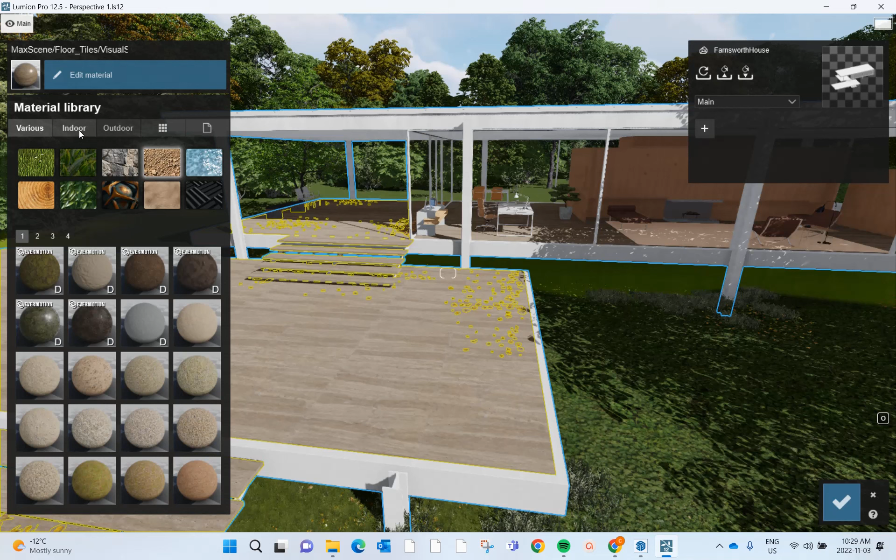Let's say I've picked indoor because I saw that thumbnail in wood that I really like. We'll go ahead and pick that one. Just like that, it brings us to a folder of a whole bunch of different wood options. If I wanted to search around and see what stone had to offer, I would click into that, and that takes me to a whole bunch of different stone options. Soil takes me to a lot of different soil options. You get the idea - these tiles at the top are really just the categories of different material options that fast track us to what we might want.

So let's say we're happy with wood right now. We'll pick into wood, and you're going to notice there's lots and lots of different things we can pick here. I will say this - you're going to notice we're able to go through different pages of materials. Now, some of them had that Poliigon icon on them, and some of them do not.

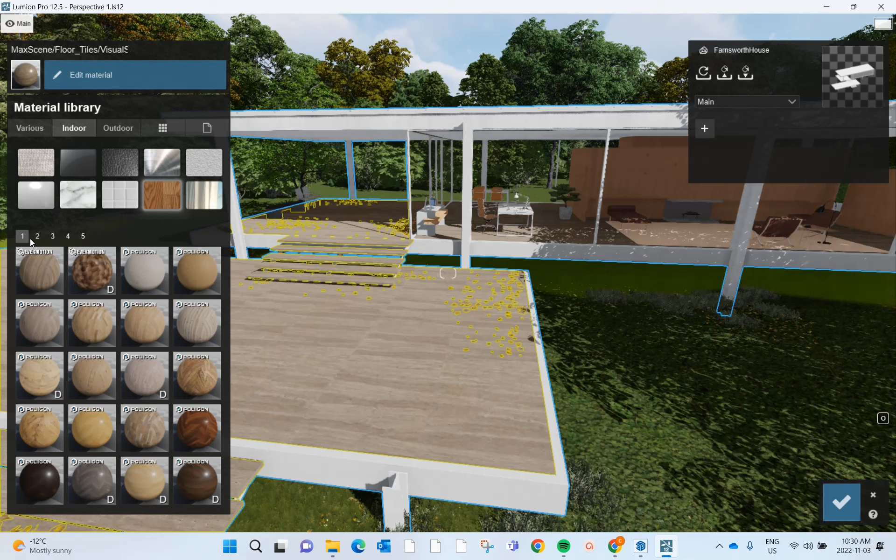Here's the deal with Lumion - it's kind of like SketchUp in the way that SketchUp has the 3D warehouse, where there's tons of different options for materials and models, and different people can contribute different models, kind of like a big hub. This is the same thing, where different people have made different materials, and as a result, some materials are de facto better than others. For example, materials made by Poliigon are really, really robust. You can really trick them out and have some fun, and I'll show you what I mean right now.

Let's say I want to pick polywood flooring. If I pick that one - okay, actually that's crazy looking. Let's pick something else - that's even worse. Sorry, guys. Whatever, we'll stick with this one. Okay, so this one's by Poliigon. Now we've picked this one.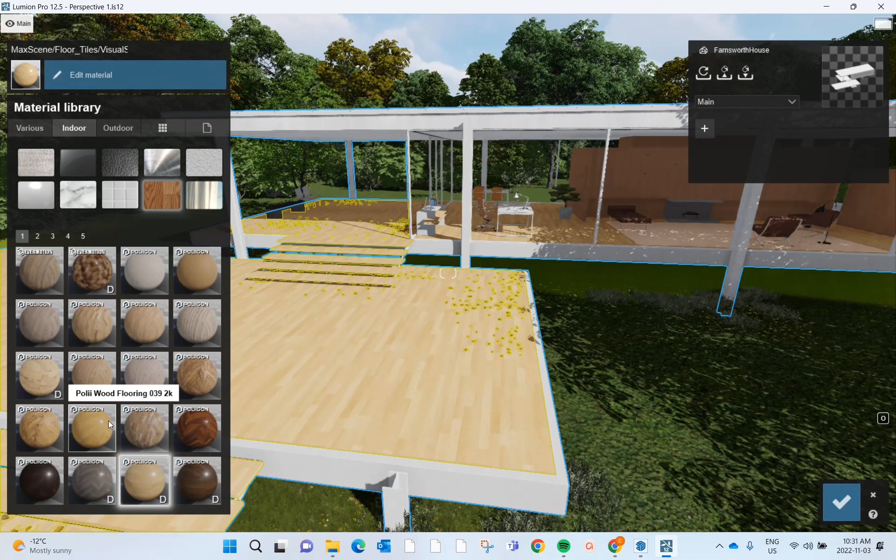Now what we're going to do is - let's say I like the slats and everything, that's cool, but I am not really quite happy with the color yet. It doesn't really look realistic. Here's what we're going to do about that. I've picked the material, now I'm going to move up to Edit Material at the top left here and click into that. I know typically in this class we're pretty big enthusiasts for showing as many tools as you can possibly show, so I'm going to recommend moving down to Show More and picking left click. You're going to notice a whole swack of other options appeared just now. So great, here's what we're going to do now.

You can trick out the color, say you want this to be a little bit lighter—okay, that's way too light, but that's fine, you can adjust this at this stage. Maybe adjust the colorization to give it more of a burnt umbery look. Thanks to the robustness of this material that Poliigon's created, we're able to adjust all that.

So we like the colorization. Maybe we want to change something like the relief. We'll move the cursor down to relief, and by dragging, the effects are slight, but you get the idea—it produces that little bit of differentiation in color. I can also adjust reflectivity and really bring up the gloss, and a lot of this will show a little bit more in the rendering.

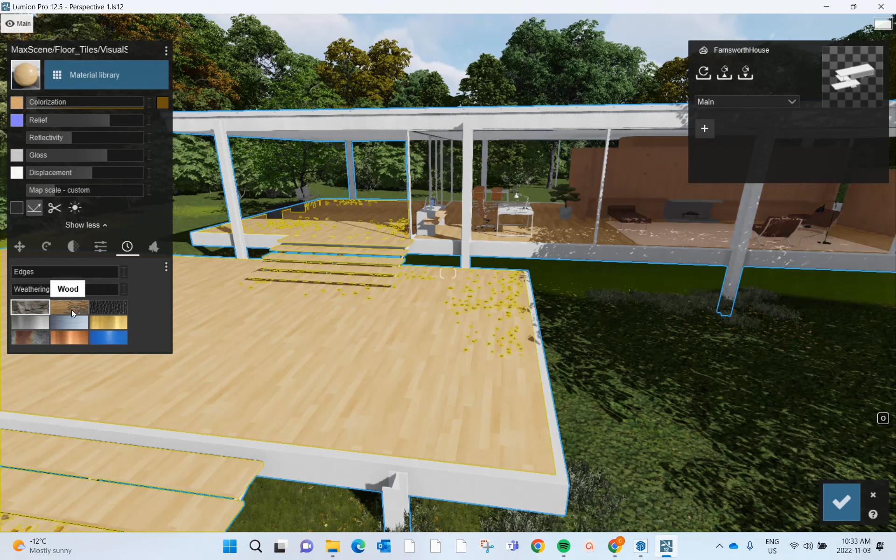I'd recommend moving your cursor all the way over to weathering—that's the little clock with the face. Tap weathering, and this is where the depth of material that Poliigon creates really shows, which is why I love Poliigon materials in Lumion particularly—you're able to adjust your different weathering materials.

For example, if I want to make this wood look kind of weathered and rough, I'm in the weathering tab, I pick the wood optional weathering, and let's see what happens if I start dragging the edges cursor. I'll drag this over like this, and drag up the weathering a little too. It can be subtle at times, but the idea is it does make it look a little rougher.

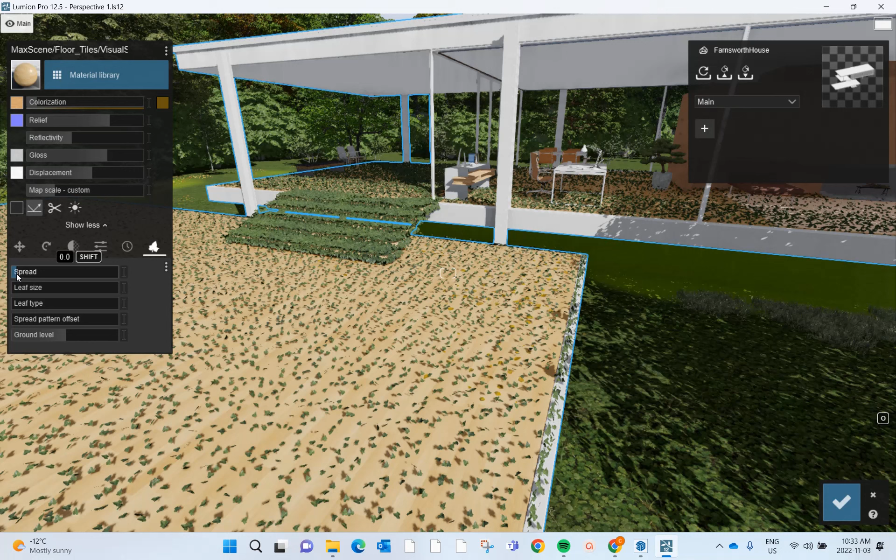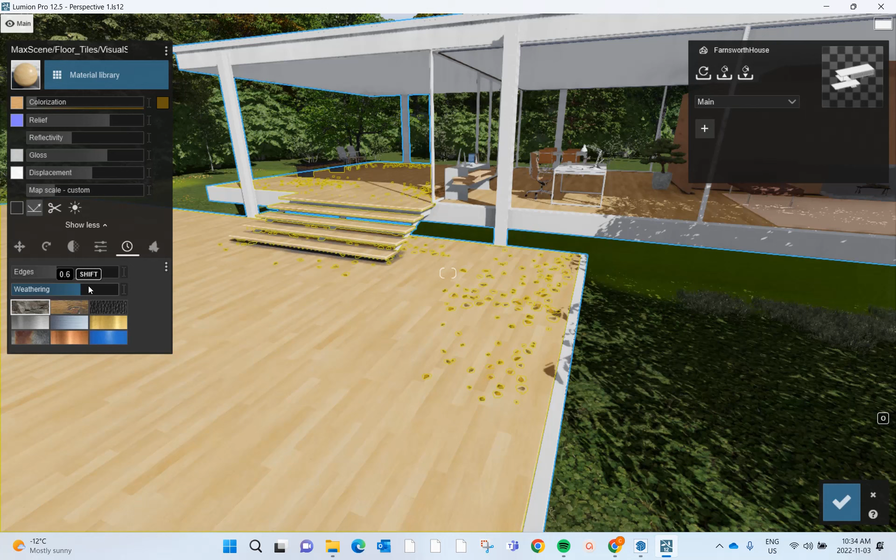I can also add foliage—whoa, okay, that's a little too much. But the idea is, if you're somewhere with lots of leaves blowing around, you're able to adjust that too. We'll definitely turn that off though. Weathering gives you lots of options for adjusting your material to look a little more spent, degraded, a little tired outside.

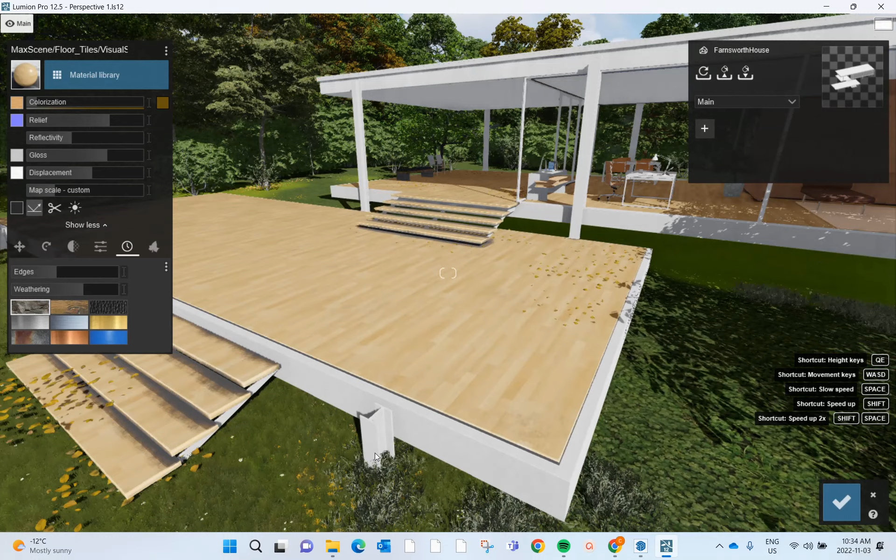And again, lots of room to play. Obviously we don't want the deck to look moldy, but by playing with the shifter a little bit, look at that—we already see some articulation in the quality of the wood, and it just makes it look that extra bit more believable.

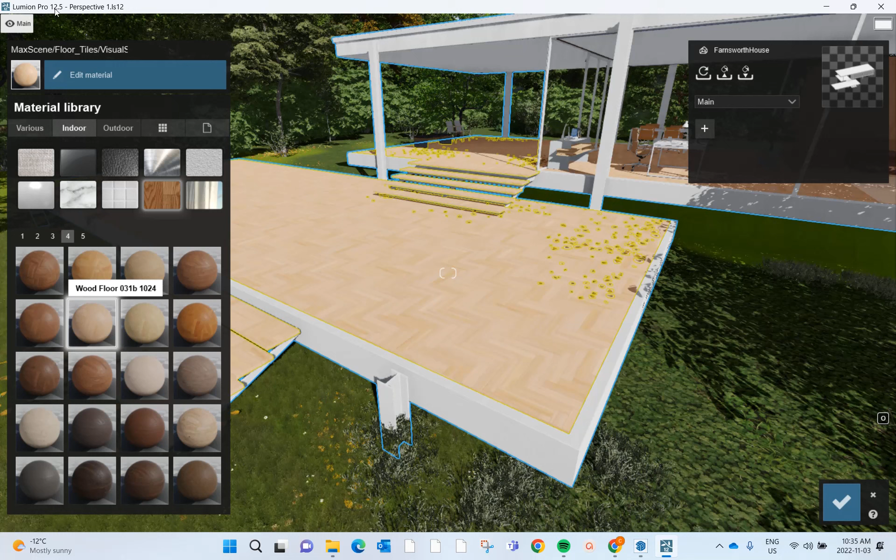So that's materials. But before we jump to anything else, I want to show you why I love Poliigon in particular. Let's say I hate this tile—I'll move up to material library, left click, and move down to something that isn't a Poliigon model. It's still fine and you can adjust it as you want, but if I pick this one and go to edit material, it's just not quite as dynamic. It's up to your personal preference—you can still adjust things like weathering—I just happen to really like the Poliigon material, so that's more of a personal recommendation.

So this is all great. Now, Entourage is obviously a really big part of your work because it does things like situate your work and show scale, all that good stuff. So this is where we're going to really start having some fun with Lumion.

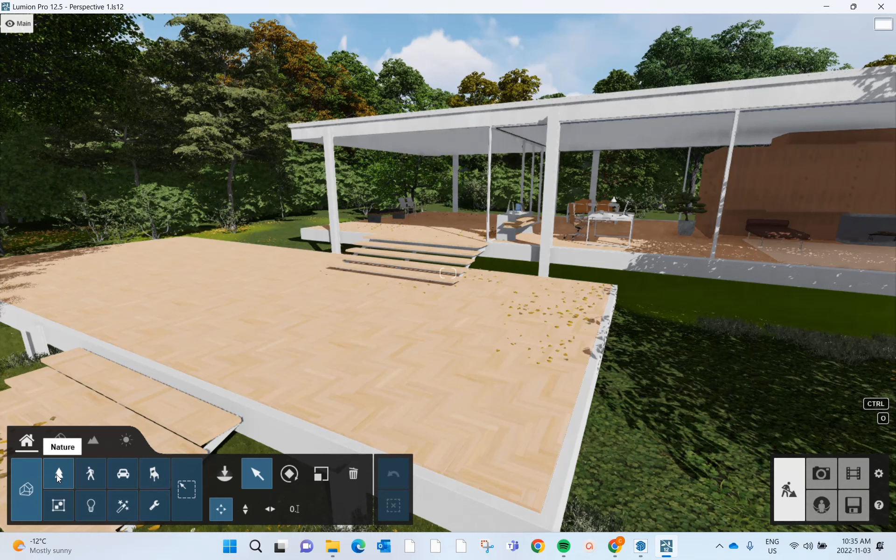We're going to move our cursor over one more to content library, and tap the little house for content library. This is where you'll have all kinds of options to bring in nature stuff—you can bring in trees, people, transport, really whatever you want. We're going to have the option to jump around and play with that.